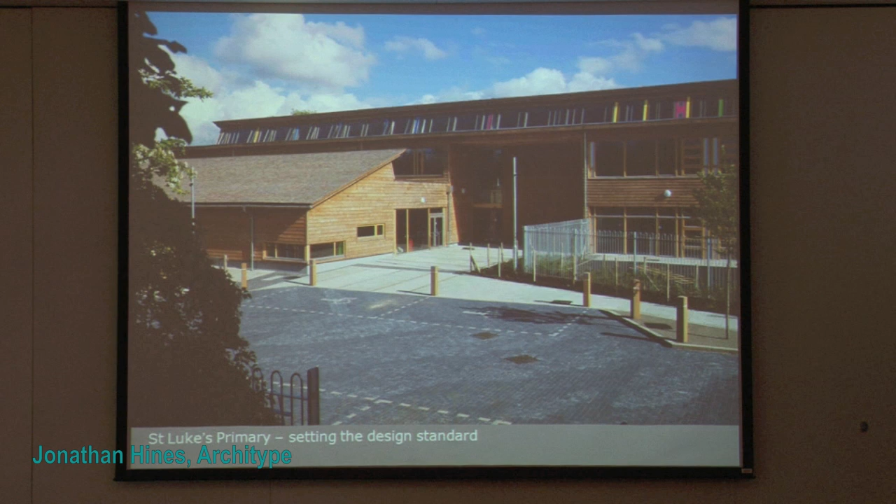In terms of education, we're looking at buildings that take that philosophy and deliver on a radical educational agenda. The example which illustrates this best, which predates our Passive House schools, is St Luke's Primary School in Wolverhampton, which really sets the design and educational standard for the projects, and which also incidentally was the first primary school in the UK to get BREEAM Excellent.

We worked here in a very tough inner city part of Wolverhampton to deliver a radical approach to a highly insulated, triple glazed, timber clad building full of natural daylight and natural materials, so that the energy consumption is good, but also the quality of the spaces is good, the environment is good.

Everything that the children feel and touch, the handrails, the floor finishes, are all natural materials: timber, lino, rubber, natural paints, in order to create a calm, enriching, uplifting atmosphere in which children can learn better and teachers can teach better.

If you want to see a little video about this school, it's down on the Architype stand downstairs, where you can see the children talking about how much they appreciate the school. Full of natural daylight and beautiful spaces, we believe that school buildings should be great places, great pieces of architecture, not just machines for learning in, places where people can actually breathe and live and be.

So the two Passive House projects, also for our client Wolverhampton City Council: Oak Meadow Primary School, a 2-form entry plus nursery for 450 children, and Bushbury Hill Primary, a 1-form entry plus a nursery and a special support unit for 240 children. The timescale: we were appointed in December 2009, had to get to planning and tender by April 2010.

Contractor appointed by June 2010, on site September 2010, and completed by October 2011. So quite a demanding programme. I'm delighted to say we handed over the first school last week and the next school this week, and the children will be starting in them next week.

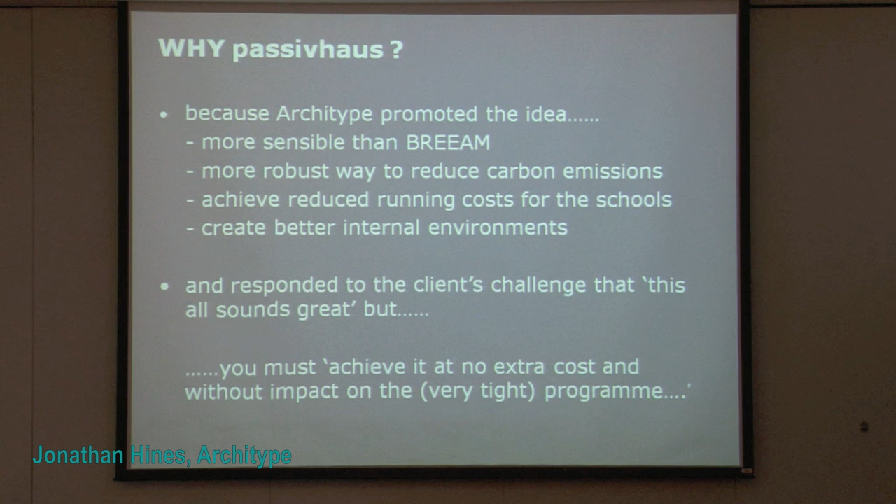But also because we responded to the client's challenge: that all sounds great, but you must achieve it at no extra cost without any impact on the very tight programme. So we had a standard allocation for a primary school in the then primary capital programme, and if we wanted to do Passive House, we had to deliver it at no extra cost.

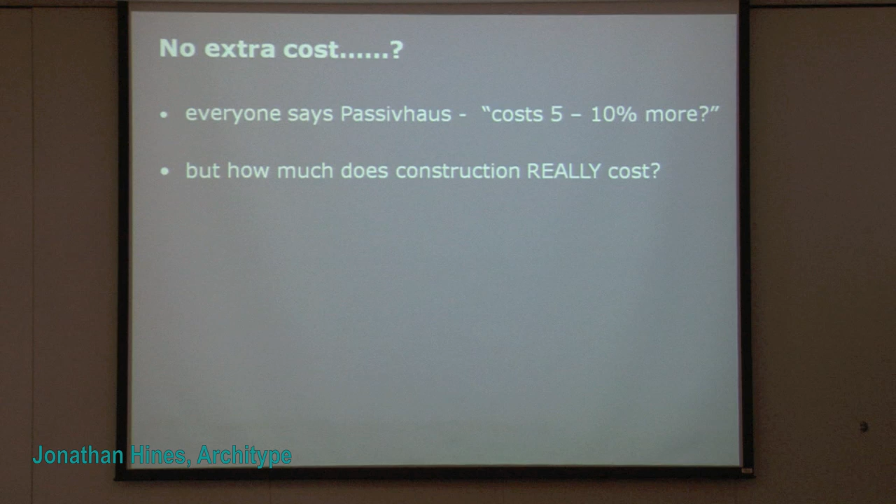I find so often, particularly when doing design reviews in Wales with the Design Commission for Wales, architects come and present a project and say we can't afford to make it any more sustainable. I look at it and they've got complicated plans, sections, bits of structure flying through everywhere, 5 or 6 different cladding materials on the elevations, tricky junctions everywhere, and they say they can't afford to make it more sustainable.

And I say to them, no, you've chosen to take your client's budget and spend it on architectural complexity. You could have spent that money and made it more sustainable.

Now obviously there are extra costs - more insulation, better performance windows, achieving better air tightness, providing MVHR. There are also reduced costs in school projects: we have a smaller heating system, we can get rid of the need for underfloor heating - in fact it's better without it - we can have much simpler controls, and there's no requirement for renewables to reach our targets.

And there are some things which obviously shouldn't cost any more. If we design a good building, it shouldn't cost any more to build. If we eliminate thermal bridging in the design, that won't affect the cost. We keep the construction simple - it should actually make it cheaper, maybe.

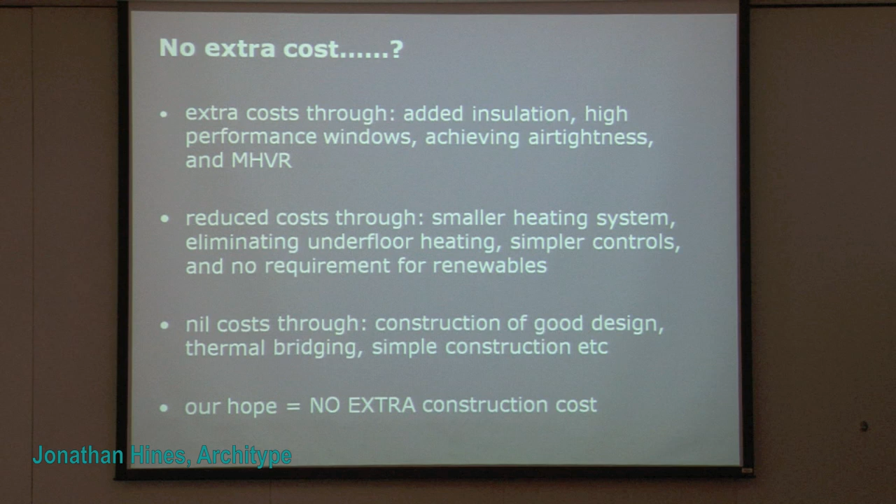So our hope at the outset was that we could achieve Passive House at no extra construction cost. Matt will talk more later about how or whether we achieved that. But our belief was that to achieve that, we had to focus on simplicity and evidence.

By simplicity, I mean looking for what we can take out to make a building work better. The simplest way to achieve simplicity is through thoughtful reduction - what can we take out of a design just to make it work better through its fundamental architecture? As the great jazz musician Charlie Mingus said, making the simple complicated is commonplace; making the complicated simple, that's creativity. Some of the most elegant, long-lasting designs in the world are the most simple.

The other thing we believe is fundamental to our approach to design is basing it on evidence. We like Passive House because it's an evidence-based, physics-based design approach. But one of the things the UK building industry is terrible at is learning from its past projects. We have a process of perpetual pilot projects, never learning from previous ones. Car manufacturers would be horrified at the way we treat our clients as crash dummies, who when they move into their buildings just have to cope with it. Hit and run should be a thing of the past.

So for the last 2 years we've been working in partnership with Oxford Brookes University on a 2-year research programme to monitor the performance of our buildings, to learn the lessons, to find out what works and what doesn't, and to feed that back into our design process. So simplicity of design and basing it on evidence of what works is fundamental to achieving Passive House at an affordable cost - in fact, to achieve any design that's going to work at an affordable cost.

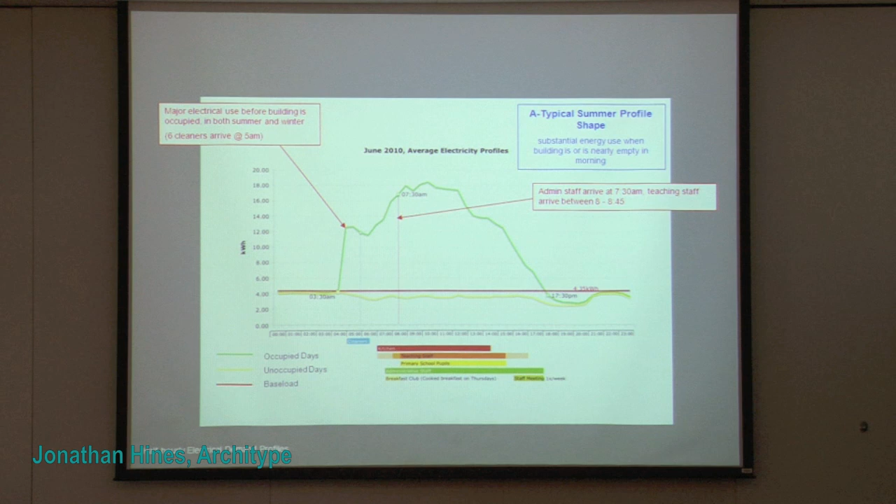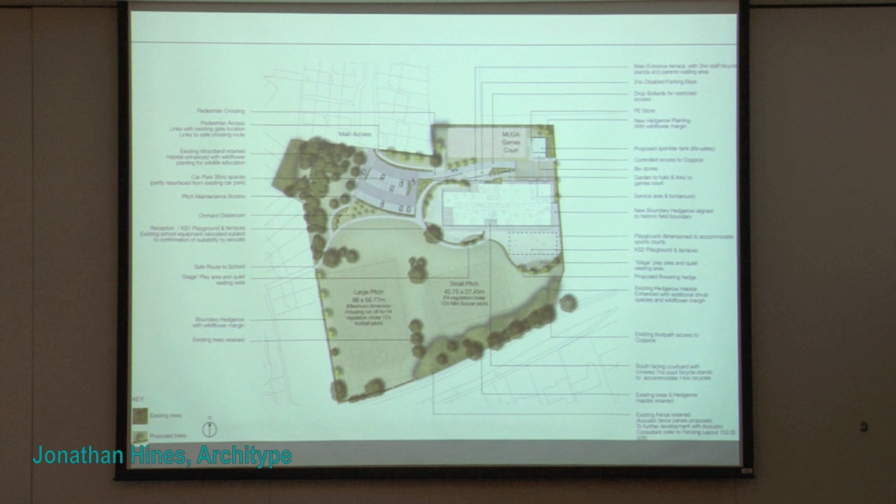So the project, Oak Meadow Primary School, 2-form entry, is a replacement of an existing primary school on a site where we were able to place the building very, very exactly on a east-west axis, with all the primary rooms facing due north or due south. We then demolished the existing school building, which sat on the site of the new car park, once we'd built the building. If you look at the plan, you'll see it's a 2-storey building.

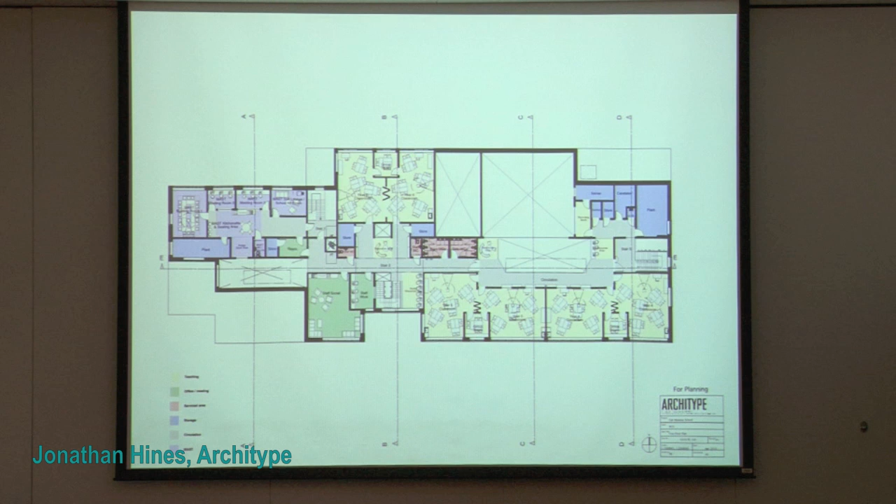We looked very carefully at form, developed a 2-storey building, kept the plan as rational and simple as possible, creating groups of classrooms organised around shared hub spaces and logical connections, good orientation, simple planning around the building on the ground floor and then on the first floor. There's a view of the building at design stage in its context.

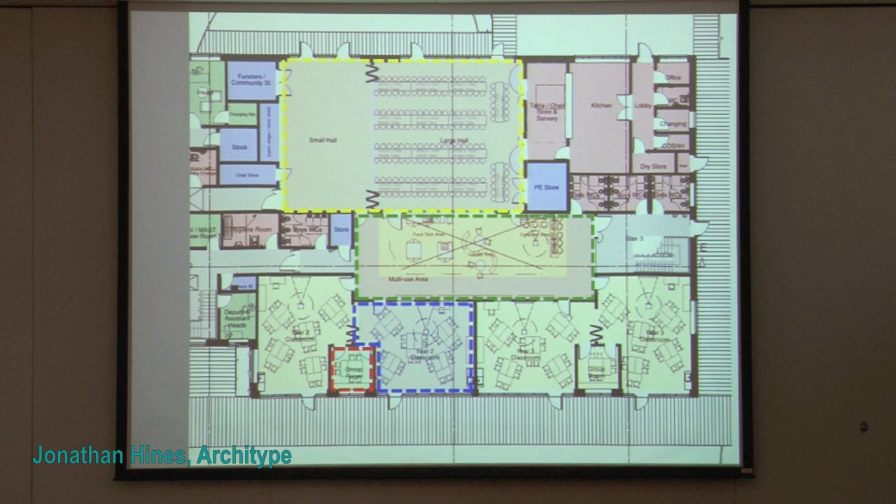Looking at the plan in a little more detail, there's a hierarchy of spaces: we've got the group room shared between 2 classrooms, then the classroom itself, then the shared activity space off which the classrooms open, and the main school hall. Nick will talk about this strategy in relation to the ventilation system in his session.

The same thing at the first floor level: group room, classroom, shared hub space, and the upper part of the hall. When we look at the section, we worked very hard to rationalise it, to have a simple extruded section that runs along more or less the whole length of the building, allowing good solar aspect but good control. We're really working with the plan and the form as an integrated piece of design to maximise its relationship with the environment and its performance in PHPP.

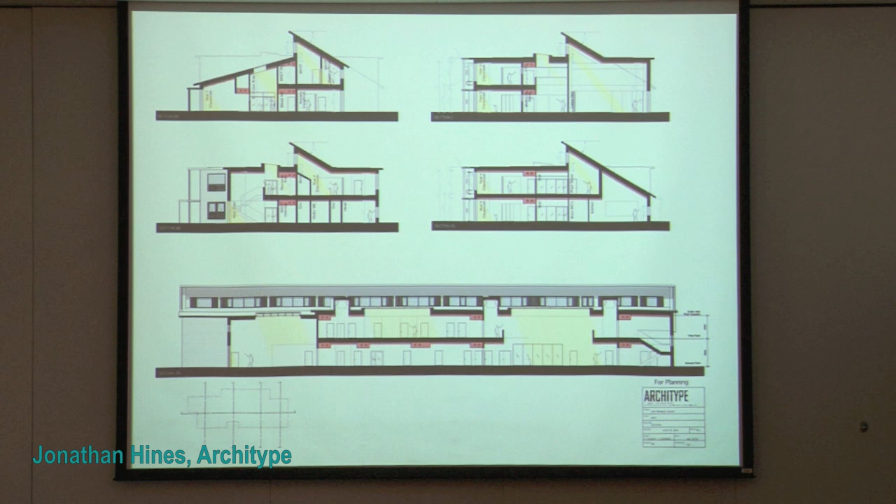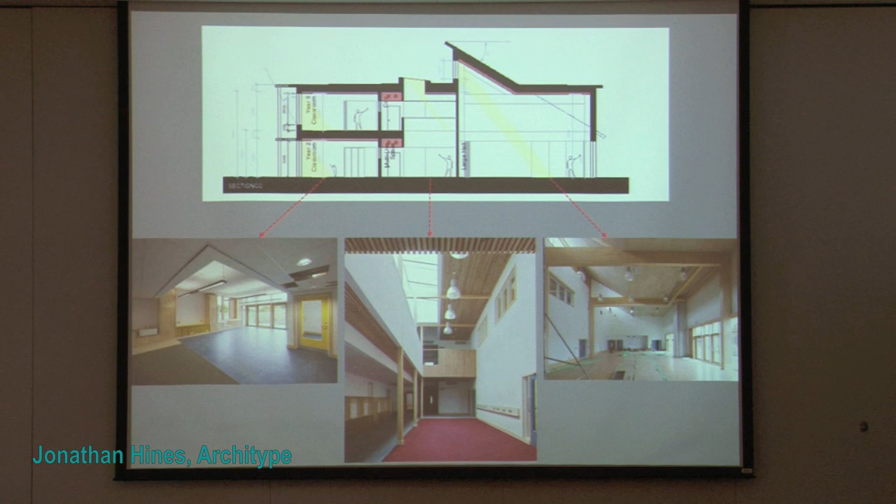Moving in on one particular section of the building, just showing you how some of the main spaces work. We've got the classroom on the left, the shared hub space in the middle, and the main school hall on the right. You can see how each of those spaces has good daylighting and a sense of connection and space between the inside and outside and between each of the spaces within. Here's another view of the shared hub space with some of the shared things like art and cooking and library spaces going into that hub space.

Upstairs, there are more group spaces that connect the downstairs and upstairs together in that hub. The same hub space appears in the early years area, where the nursery and the young children have a shared activity space connecting their classrooms together.

From an architectural point of view, another aspect of making the architecture work with Passive House and the cost, we spent a lot of time looking very hard at the glazing. Glazing is very expensive, as you know, to get to Passive House levels. So we looked at simplifying the glazing, looking very hard at what open free areas we needed for ventilation in summer conditions, for night cooling, to work with our overall strategy.

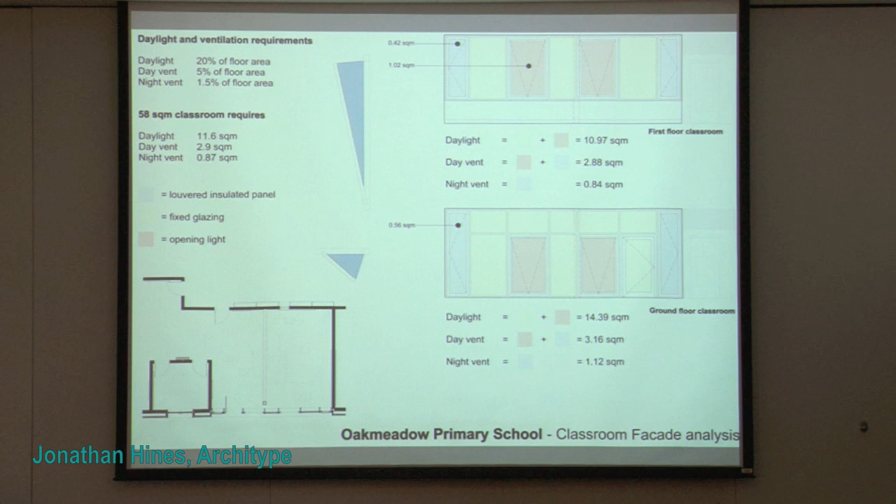A lot of effort there on keeping things simple, having some very big openings and secure night insulated louver panels. And there you can see the finished building in relation to how that's worked.

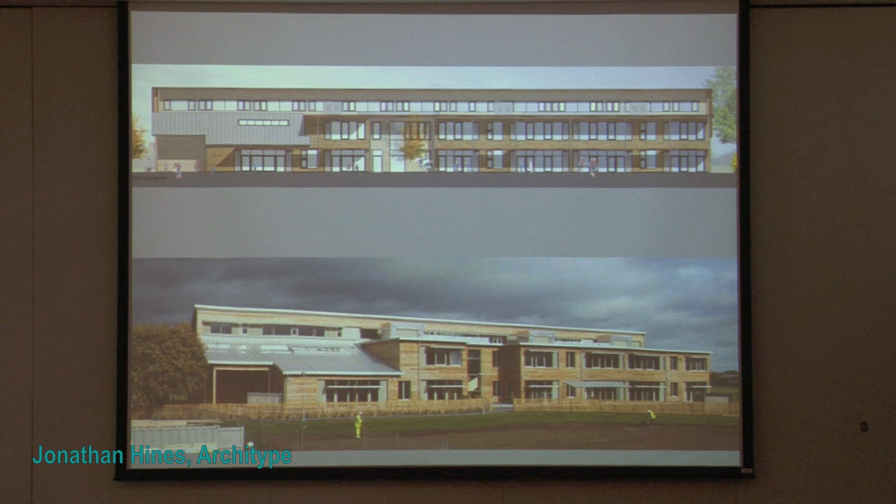And the view of the whole building emerging in its context. You can see there the very simple rationale of opening doors, ventilated louvers, brise soleil, allowing good solar aspect but also good shading.

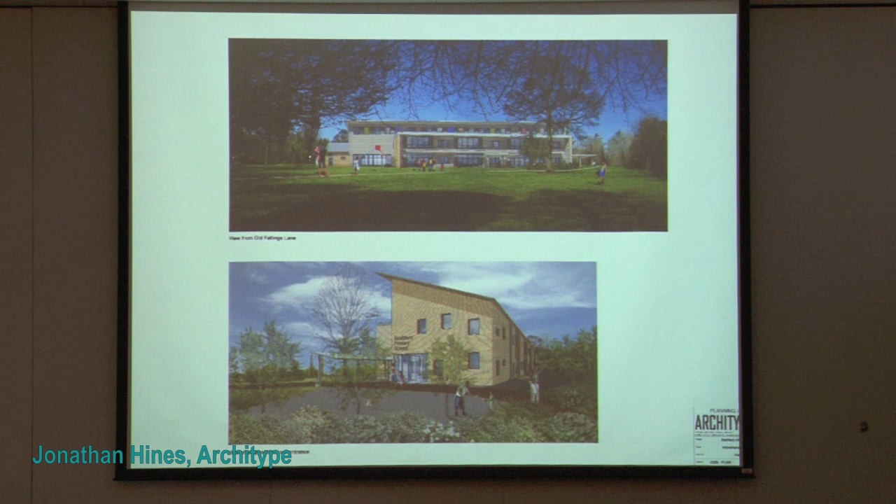The other project is Bushbury Hill, a slightly smaller building. This site had a completely different orientation, but we located the building again to face the correct orientation, north and south, within the slightly strangely angled site. What that does is create a whole series of opportunities for some really interesting outdoor spaces within the site itself.

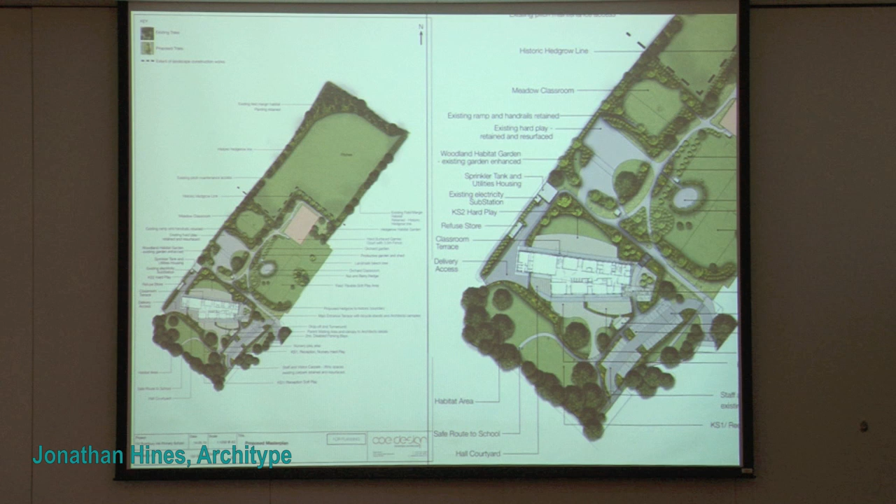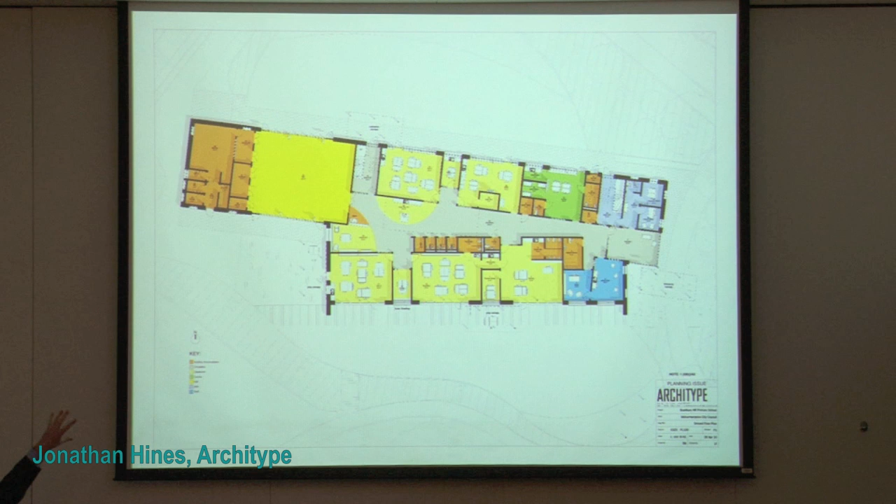Being a much smaller building, we've actually come up with a much simpler plan. Like all of our school buildings, we're trying to get rid of corridor spaces and use those as actual teaching spaces. So here, we've got the two halves of the building pulled apart slightly to create a very generous shared access and activity space with the school hall and the kitchen on one end of it.

Again, a lot of effort put into keeping the form of the building very simple, with an extruded section that runs right through the building.

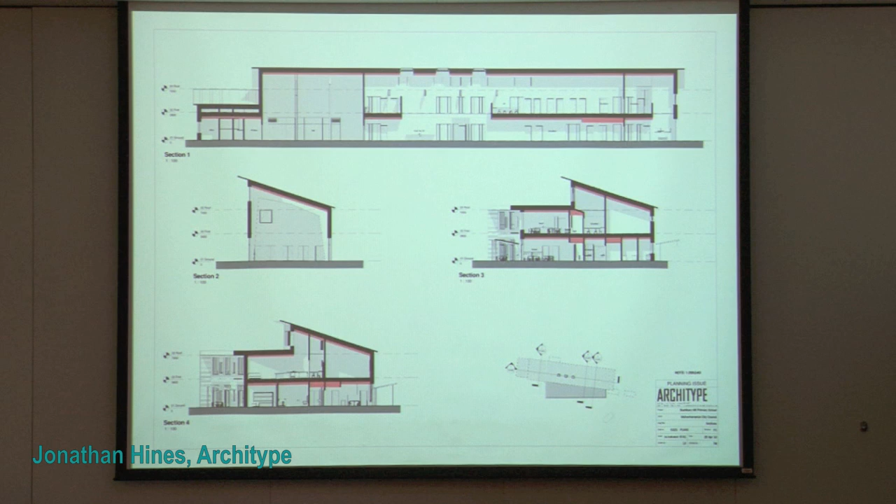Here you can see the two parts of the building, the classroom unit to the front, where we've used, for most of the windows in this building, the roof overhangs on both buildings as the brise soleil instead of a separate brise soleil - a slightly different approach on this project.

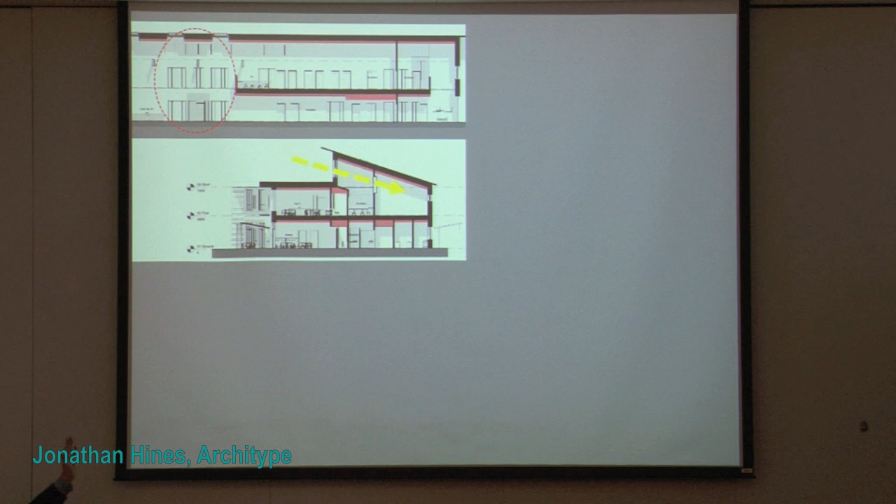Moving inside the building, a very simple section. South is obviously on the left-hand side here, so you can see the classrooms on the south with good solar aspect and the overhanging roof for the brise soleil. We've got a number of classrooms on the north side that actually get very good daylighting borrowed through the hub space, which you can see with the yellow arrow there.

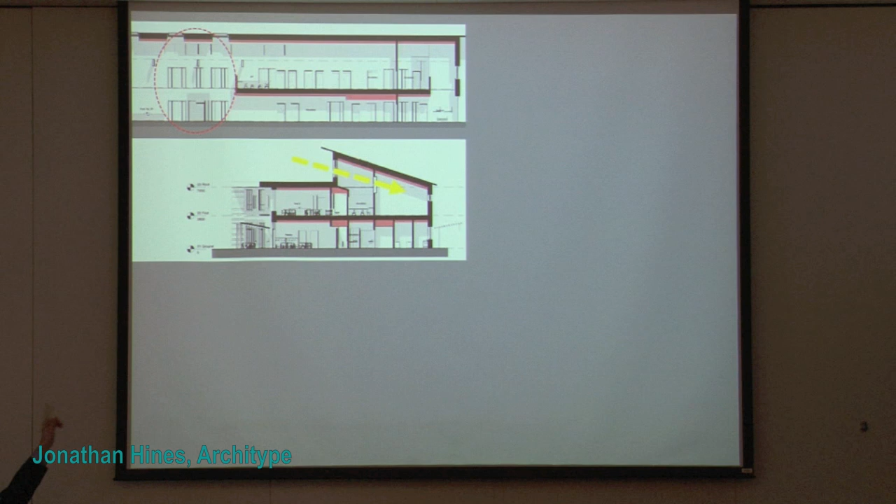When we move inside, you can see at the bottom left that shared hub space, with some of the glazing connecting that hub space into the classroom on the north side, and a picture of one of the rooms on the north side, which has such good daylight in it you would never believe it was on the north side of the building. Borrowed light works extremely well there.

Hopefully in all these pictures you can see that Architype combination of natural materials: timber slatted ceilings for good acoustics, natural linoleum and natural rubber on the floor, a lot of timber with natural organic finishes, natural paint on the walls - a whole palette of healthy, natural materials.

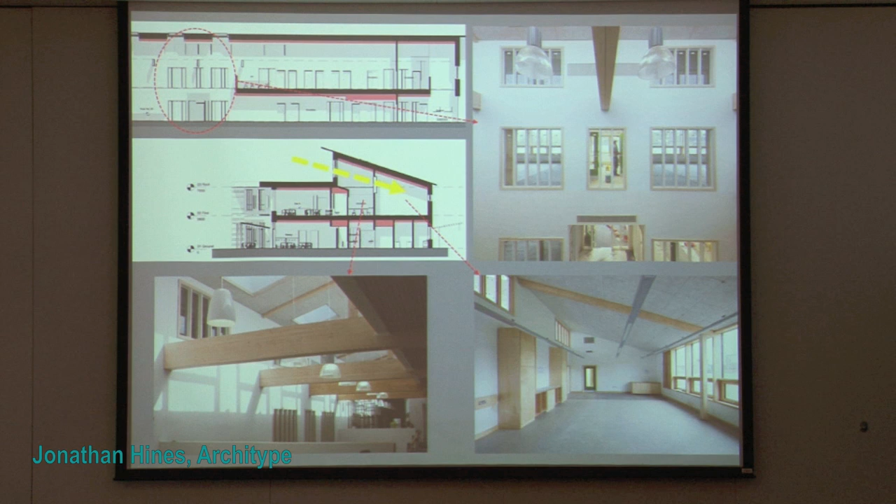So what we're trying to achieve, what I hope I've demonstrated, is that we've managed to keep hold of our passion for design quality, of healthy building, of good daylighting, of good materials, in a building which also achieves the very technical demands of Passive House.

For architects, in the words of Steve Jobs, design is not just what it looks like and feels like, that is fundamental, but it's also how it works. And so Nick is now going to take us through how he helped us make it work.

It would be nice to start with a small detached house, but we started with 3 schools as our first Passive House project. It's a bit at the deep end, so we had to do a lot of desktop studies - looking at form, structure, ventilation, heating, primary energy and certification. There's a lot to cover, but bear with me.

We started off with visits to Germany for Passive House conferences, which we've been going to for some years. Alan, who I work with, went to Belgium - there was a study tour there looking at education buildings. This was really to gain confidence, because when you start looking at tiny boilers, tiny pumps and tiny pipes, you need the confidence to do the sums and believe the calculations. Seeing is believing, I think that's really important.

One problem is that a lot of the knowledge is only in German. There's lots of information on domestic buildings, plenty of that out there in various languages. But when you get to schools, there aren't so many built, and there are key bits of information which, not being a German speaker, we'd notice interesting-looking drawings and think there's something important here. So that was a potential stumbling block.

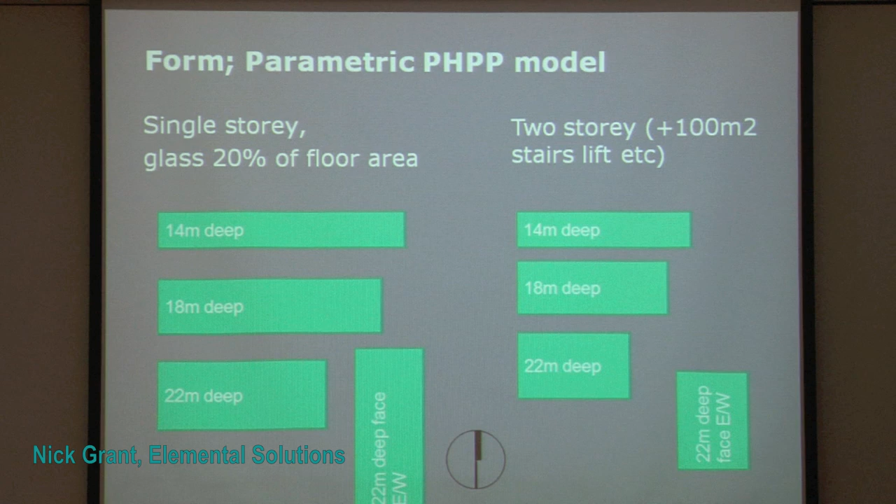There's incredible complexity in PHPP, but because it's a spreadsheet, you can write very simple front ends. Here we were just messing around with the idea - okay, we can do single story, 2-story, change the depth, rotate it. Without knowing what it's going to look like, we just put in an area of windows, set at a certain schoolish window size, and the spreadsheet says you've got 57.5 windows, it's fine - the math still works. So we could do this analysis and try various things. With 2-story, obviously we've got stairs and lifts, so we lose some treated floor area, but overall for this building you can see there's a real benefit in the compactness of a 2-story design.

The other school we're working on, which is what we did this analysis for, because it was that much smaller, the stairs had more of an impact and we ended up single story. So there's lots of things to balance, daylighting, access, costs, so many different things. But we can do this analysis and it's part of the process of weighing everything up.

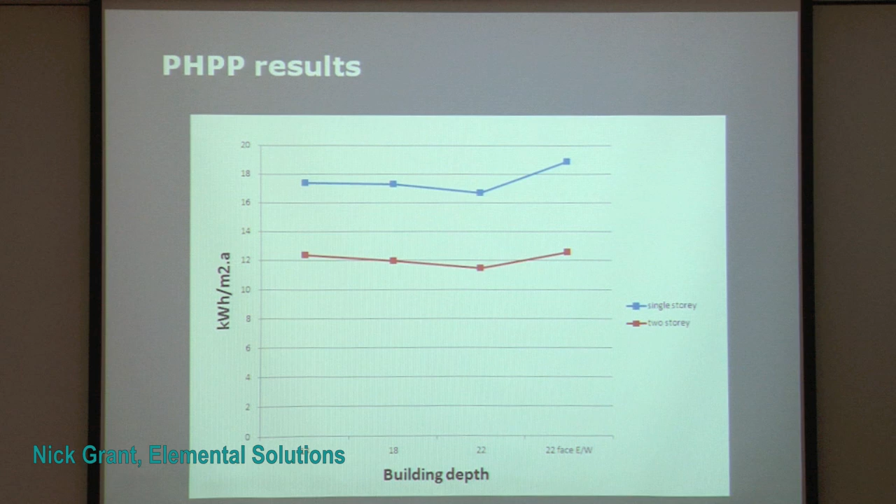And at a very early stage, this pre-planning, we've got a sketch design, we've got the rough shape, and the architects are saying, oh, have we passed? Have we got Passive House? Pre-design stage, pre-planning, and the spreadsheet saying 14.9 kilowatt hours, and they're all going, yeah. And we're saying, no, whoa. No champagne yet.

There's a real danger at the design stage, not only because you haven't got any slack, you need some slack, stuff you haven't thought about, the mistakes you're going to make, the things that come in later. But also, if you set a much tighter target when you really are at the conceptual stage with basic U values and so on, you've got a real chance of making the school cheaper.

If you're too tight at that stage, you start having to use thicker walls, you have to start using very expensive glazing, you start having to get a more expensive MVHR, you start having to add things on because you've slipped and slipped. So if you can hit a really good standard, you can say, well, we can take some insulation away, let's not overdo it.

So I think this is, if you want to get a cheaper building, you've got to let the form do the work. It'd be nice to talk about why architects, even if you don't learn PHPP—and it seems daunting, but it's just very basic physics—I think it's got to be, whether it's the engineer in your office or you're learning it yourself, that interaction, that iteration is really important. That happened with these projects.

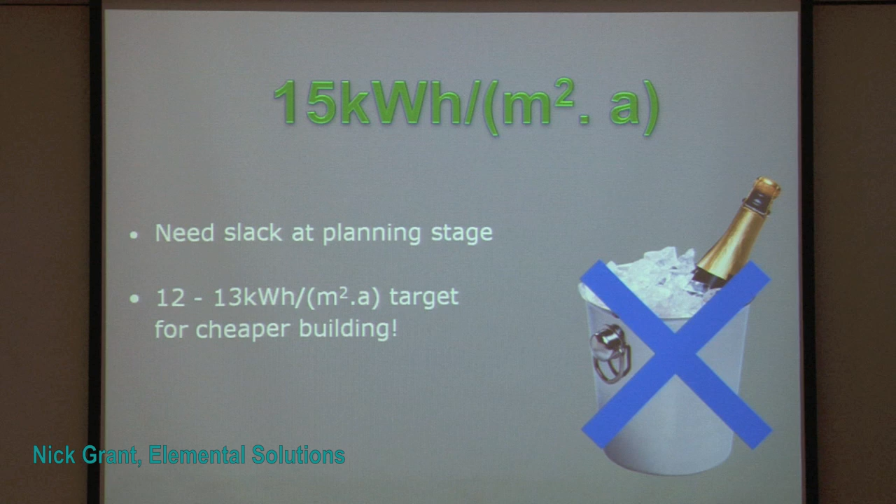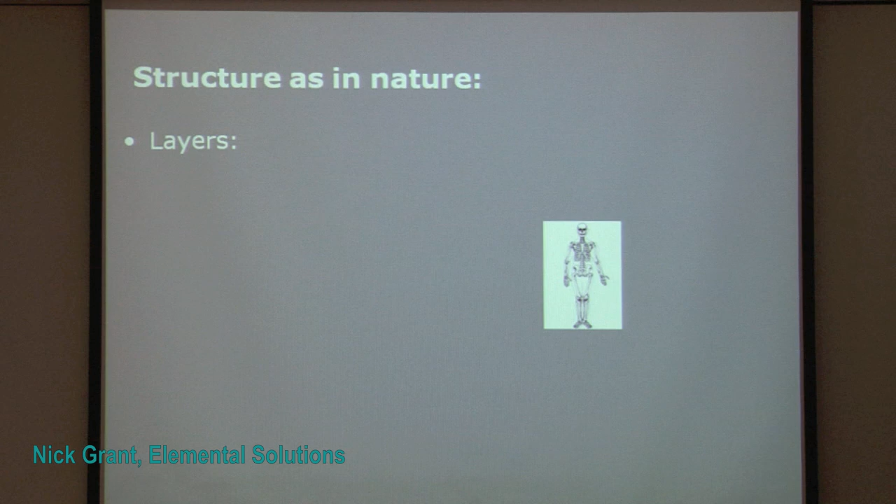PHPP aside, the other thing I feel passionate about is thinking how all the structure happens. And I look at nature with the human skeleton or any mammal. Generally in nature, the skeleton's on the inside or the outside, okay? And for mammals, it's on the inside. So this is coming up in the wrong order.

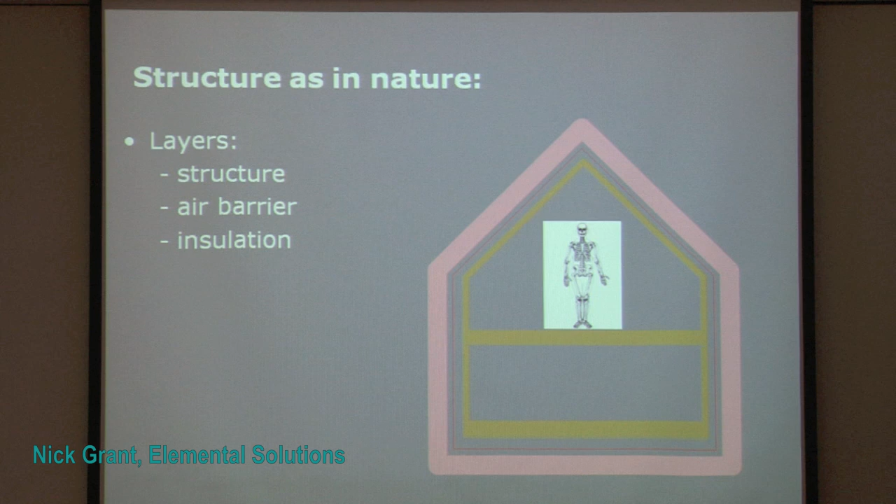So we've got the structure on the inside, typically. We've then got our air barrier coming around the outside, so it's continuous. We then wrap it like a tea cozy with our insulation, completely continuous. So again, the body is like that. It's only where your teeth come through. And that's the bit where you have to visit the dentist every 6 months and have medical insurance and stuff, because it's a problem. So then we've got a wind and weatherproof layer.

And then external structure, whether it's porches or brise-soleils or whatever, but the important thing is no penetrations through the structure. Now, sometimes you have to do it, but there's always a cost involved, there's a maintenance issue, there's some fancy bits of German kit to make it possible. So if you can avoid that, then that really makes your buildings cheap and simple.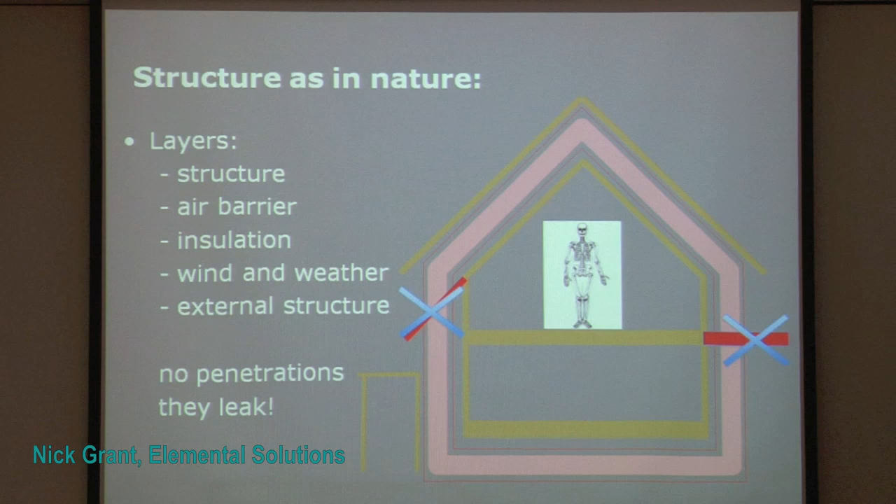So here's the build-up. This is Bushbury School. We had a problem here. We actually had on the site cellars and mine workings and all sorts of stuff, so it obviously had to be a pile foundation, which is a thermal bridge problem, an air tightness problem.

What do we do? So the solution there was sketched on a napkin at EcoBuild, handed it to the structural engineer, and it appeared on the drawings, and it went through the whole thing, and nothing changed, so it was quite impressive. So we've got strips down the length. Do you remember on Bushbury? This is Bushbury with the one that was at a slight angle, so we had 3 strips on piles.

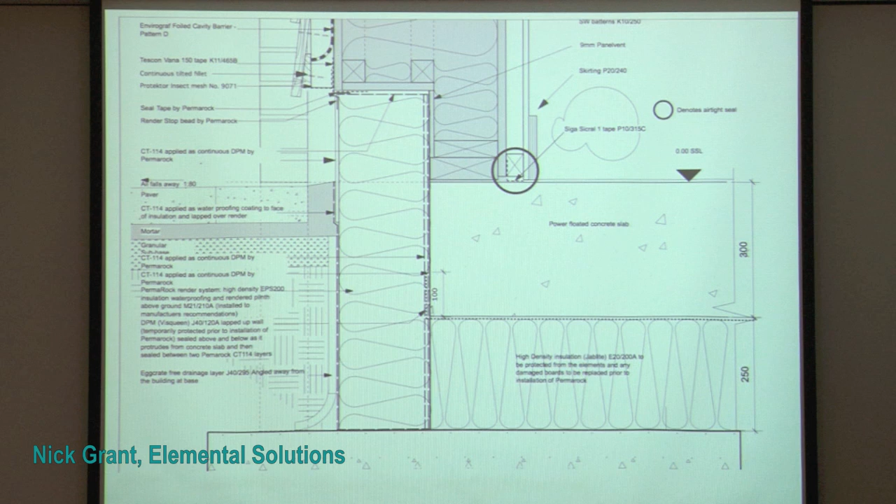We then put EPS insulation over the top, so that's the structural bit. We've got the slab on top. Insulation, so it's just floating, no penetrations through that. We've put edge insulation around the slab, and the load is all taken onto the structural slab and the internal walls inside. So the whole thing's completely thermally bridge-free, completely wrapped.

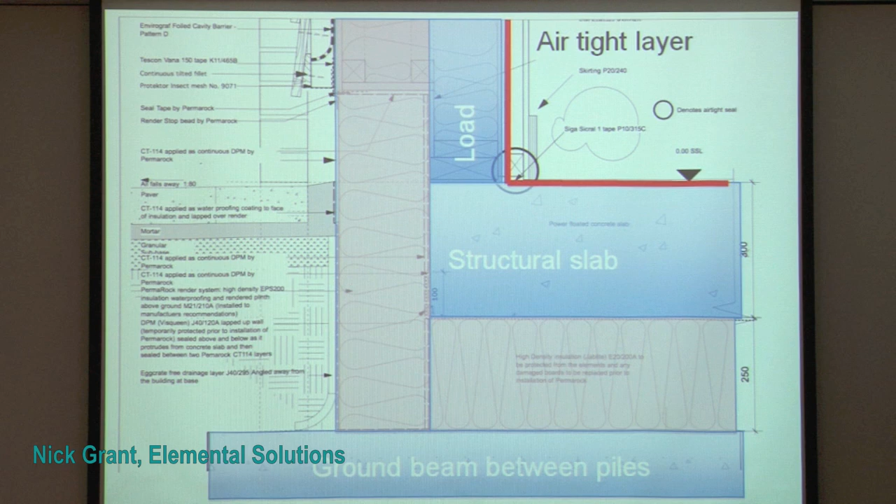And you see the wall build up here. This has got quite a high timber fraction. This is 140 studs taking the load, and outside it's light and fluffy. And to keep it level with the ground, because we've got level access, we've got EPS coming up until we get to the point where we're confident about using timber, so we're above the splash line and so on. So then it's thermally modelled, thermal bridge free by external dimensions, heat flux and so on.

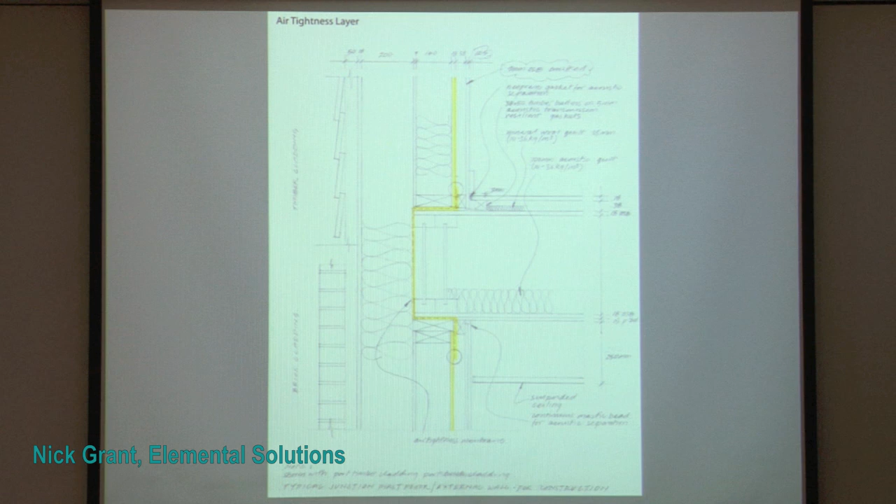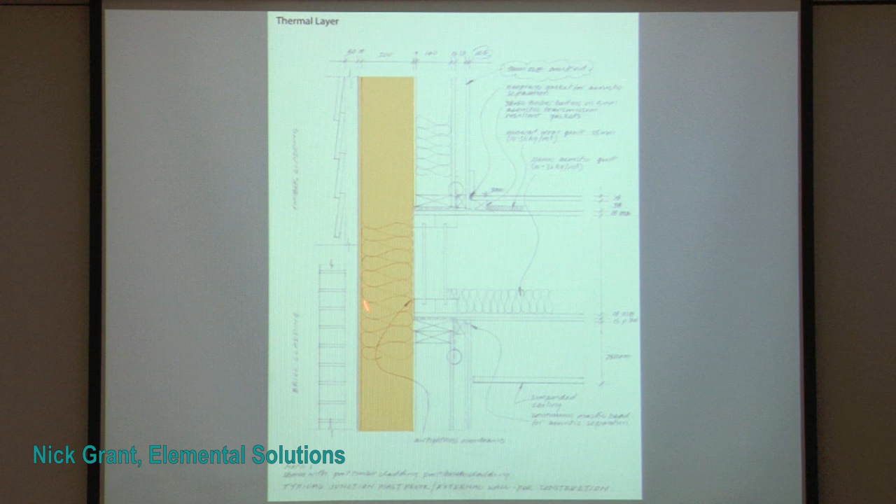We get to the first floor, so it's got to go in. We've got a compromise here, we're having to take the air barrier around. We're not penetrating the structure, it's in the same line, but we've got to wrap the air barrier around that structural zone. We've put some insulation in the structural zone as well, and we've got a service zone here to protect the air barrier. This is continuous, goes down to the floor and joins up with the roof as well.

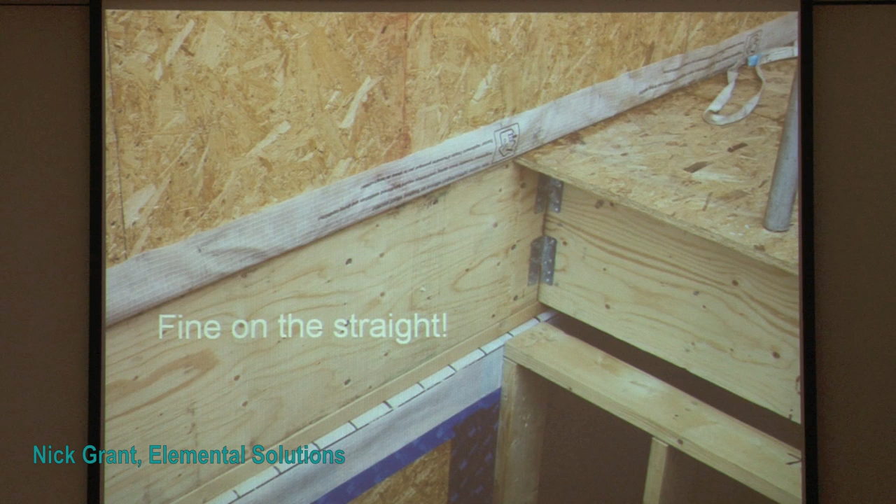So this is the section, you can see the air barrier here is the OSB. We tape it onto the membrane, it wraps round the structural timber there and carries on down. Very nice, simple detail, until you get to a post in a corner on a Friday afternoon and everything goes terrible. But it got resolved.

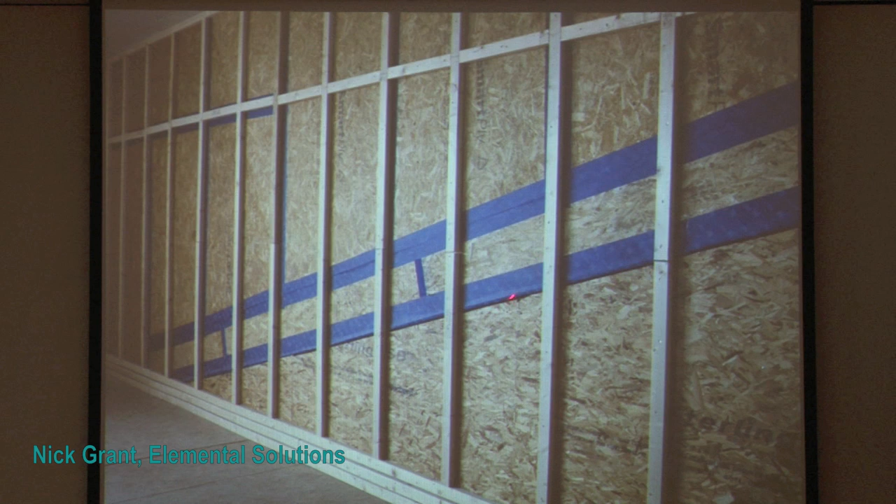So here's how they solved it. This is the air barrier, this isn't air barrier, it's just structural. The air barrier has to go through there, and that becomes the underside of the roof we saw, the lean-to roof. So it's the sort of stuff we've got to think about. Here, glulam, because the timbers are going that way with the insulation, but we're spanning onto this, but this stops short of the outside, so it doesn't go through the air barrier at all, which makes the detailing much easier.

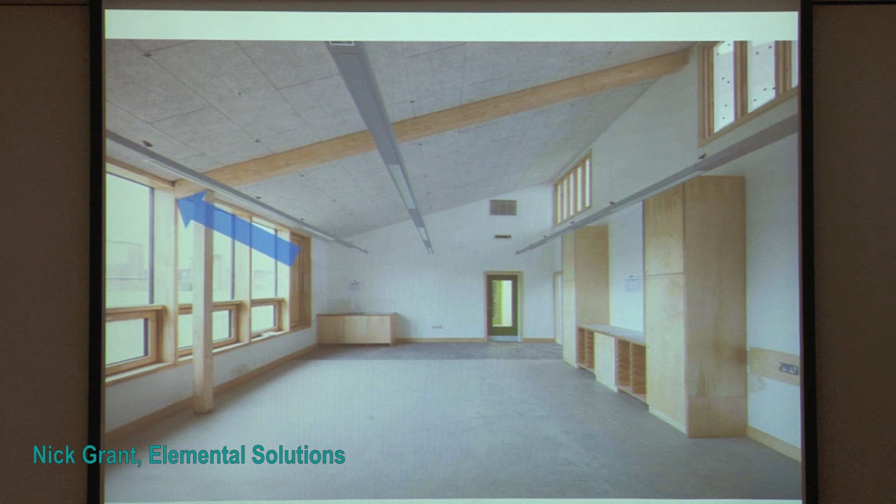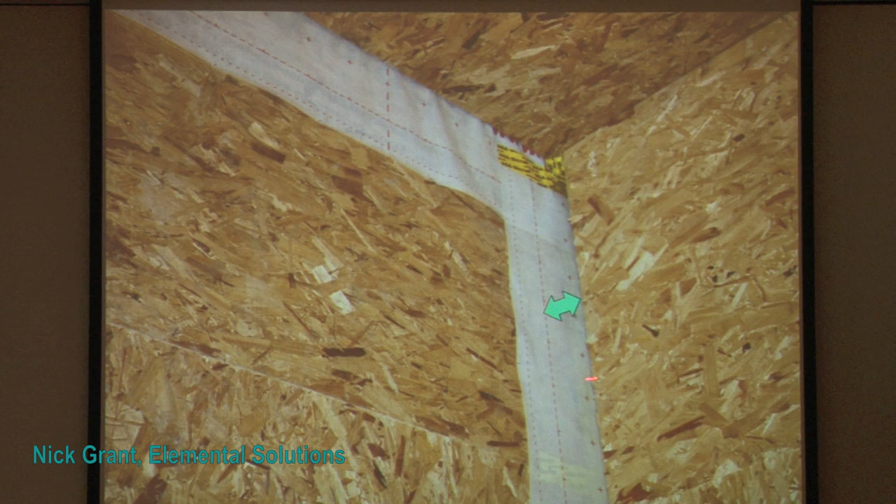And then the internal walls - this is an external wall, this is an internal wall. We've left a gap, so it means we can do the air tightness, we can tape that, we can run membrane through, and then we add in the timber which locks it all together structurally, and this becomes our service void. Very good detail.

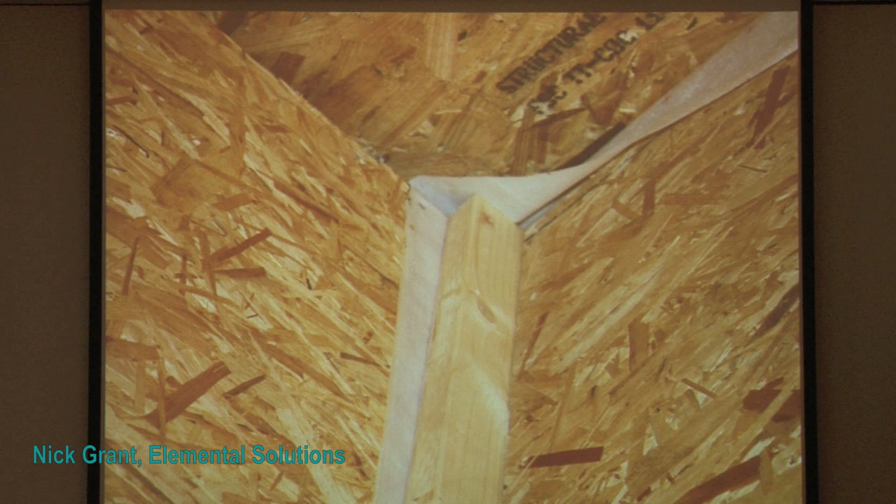Took a little while for the timber frame contractor to get this. He's now on site with another school, I was there the other day - brilliant, he's just really got it. It's not a problem, he realises why we're being tricky with him. Something else I've been doing for quite a while now - again, overhangs and stuff all sat on the outside of the windproof layer, so there's no penetrations there.

Ventilation strategy - there's a general thing with Passive House, we're supplying to living areas and extracting from wet areas like bathrooms and kitchens. Similar idea with the school, so we're supplying to group rooms and classrooms. The air's moving through very large transfer grills, because we're also doing the natural vent strategy through the same transfer port, so that makes them quite big and expensive, but it means we're also ventilating with windows in the summer. And then we're extracting largely from the hub and the street and toilets and things which connect into the hub. This is our air handling unit here, so that's the general principle of sending the air through there.

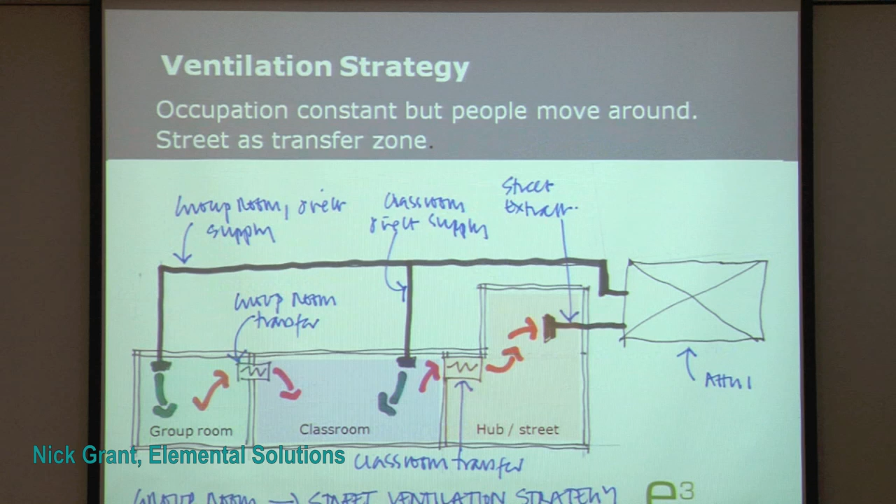Now, one issue is the hall - what do we do there? Because the kids, when they're in the hall, they're not in the classroom. So one method that is used is you have dampers in all the classrooms with presence detectors, so when the kids aren't in the classrooms, you shut them down and transfer, opening up other dampers. So we could have done that.

E3, as you hear from E3, came up with this very neat idea. We treat it that if you're not in the classrooms, then the air is clean. So we're pumping air into the classrooms, it's coming out of the classrooms into the hub space. And then when the hall's CO2 level goes up - we've got one CO2 monitor in here - the fan sends air from the street into the hall and around. We've got recirculating mixing where we can, with a heater battery, if the hall's a bit cool we can just quickly warm it up like an air heater, so we very quickly take the chill off if there is a chill. If it's a prize-giving evening and 1,000 people, we open the windows - it's not a problem. So trying to keep it simple.

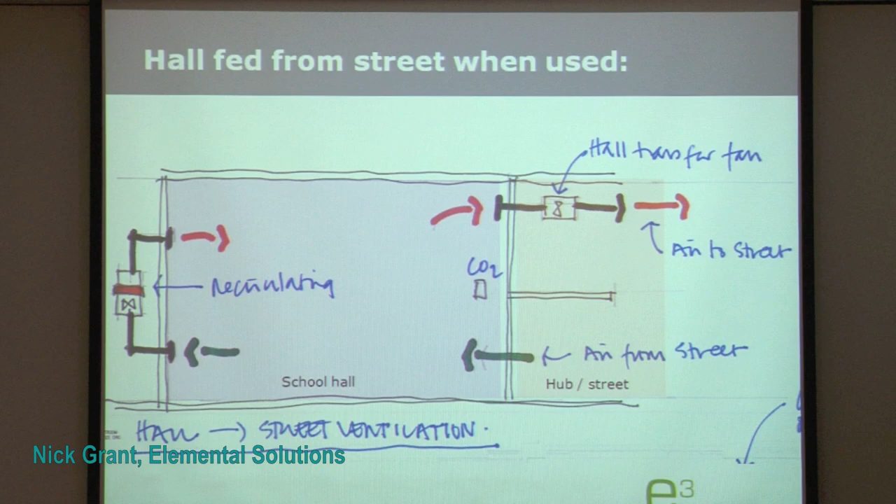So here you can see it working - that's the hall transfer fan. This is the recirculating with the heater, so that's just to mix the air up.

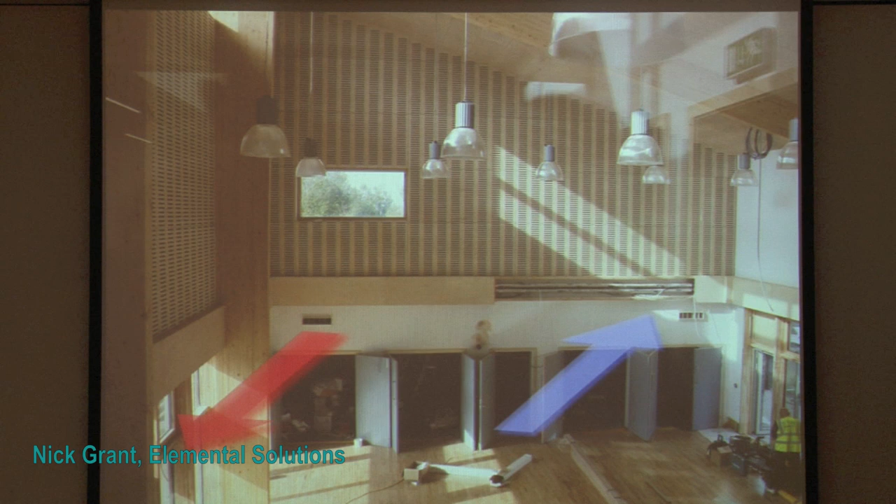But they're taking the fresh air from the street area. So other issues with non-domestic, with time control - there's a lot of fan power. If we're running the ventilation all through the night, you also tend to make the air overly dry because you're ventilating when there's no moisture being generated. So we want to turn the ventilation off. Fine, that's easy to do with a timer.

Wolfgang Feist said the thing you must do if you do this - it's the right thing to do - but you must dry the filters before you turn it off. Because if it's very humid, foggy outside, the air's coming through the filters, then you turn it off, the filters are all moist, and when the air's moving it's fine. But when the air stops, mold can grow, and when you turn it on in the morning you can get smells and odour problems. He says it's been a big problem in Germany. We didn't know about that, we nearly didn't do it, but we had to introduce that into the system.

CO2 modulation is simply built into the heat recovery ventilation units, so it'll tend to just modulate it for the whole school. We haven't got individual sensors apart from the hall, partly to keep it simple.

In the summer, we're turning the ventilation off. We're still needing, in the kitchen, to get rid of heat, so we've got serious extract on the kitchen, which has its own heat recovery, only 50% efficient. It's just to take the chill off - that's really just for comfort.

But in summer, the toilets still need ventilation, and they're in the core so they don't have windows. We've got some landlocked small rooms that wouldn't get ventilated, so we've got another fan that runs in summer, but we're turning the main MVHR off in summer. It was a decision, using window ventilation instead.

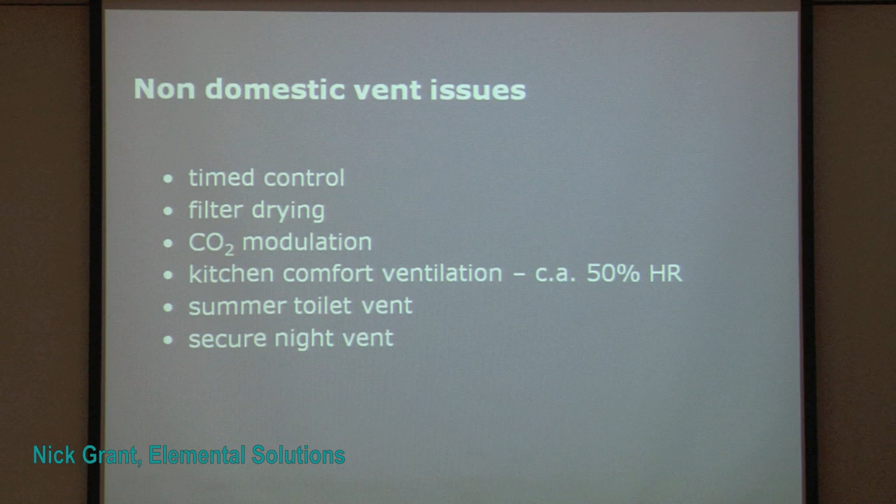And secure night ventilation - we discussed this earlier - is really very much built into this, that is the cooling strategy at night. We have grills that open, you see at the top here in the clerestory. Behind that, there's an insulated panel. In daytime, we've got windows that open.

These high ones are all on actuators. The lower level, our preference now is for manual opening. Someone becomes the night ventilation monitor, watches the weather forecast, and does this. We think this is a robust way of doing it. We've got one that's automatic, one that's manual - we'll see how it works, but my money's on the manual one.

So secure ventilation, we leave it open for night purging. Kitchen, as I say, was a big challenge.

We didn't have much information. There's a tendency that previous schools have had overheating problems. We were pushing to not over-ventilate, not try to solve overheating with masses of ventilation, but try to reduce the gains. So we're using induction cooking rather than gas, efficient ovens, all A-rated refrigeration and so on. We've got rid of the hot water circulation, which used to be uninsulated pipe running around the kitchen acting like a radiator - so everything's dropping from the ceiling now.

So we've really gone to great lengths to try and get the gains down and reduce the ventilation rate, but it has its own MVHR with a runaround coil on the kitchen.

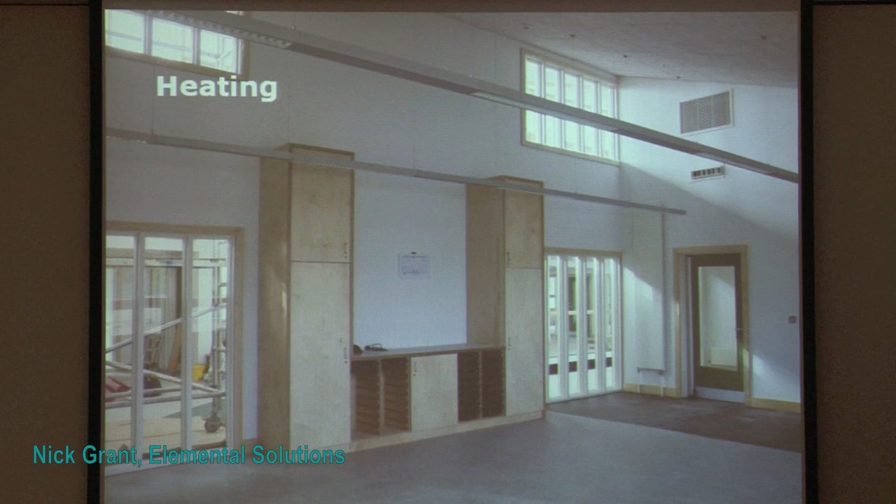The heating system, if you can spot it, is very discreet - radiators, just a few. I think the next school will have even less radiators and they'll be smaller, but we'll see. There's a bit of nervousness when it's your first one, if people are cold in the winter, but at the moment looking good. No underfloor heating for various reasons, which we won't go into.

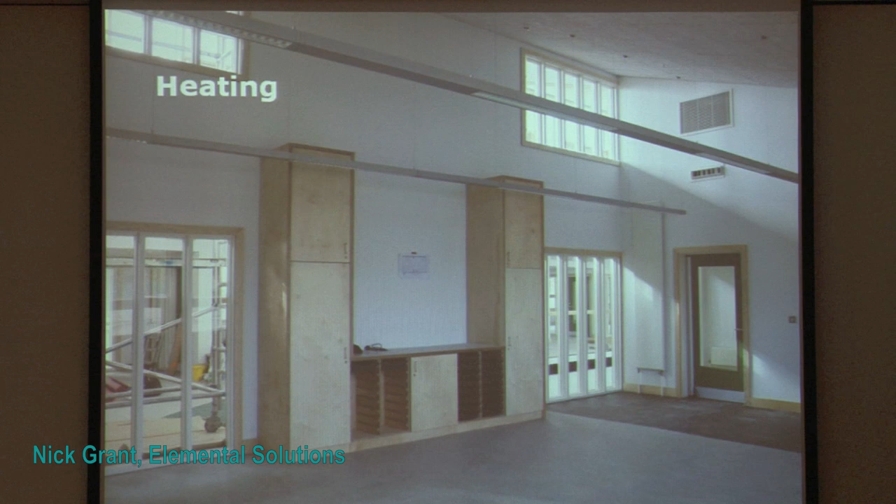And you see here the borrowed light that John mentioned - very effective.

And the boilers - this is Lee, the job architect - two boilers here. He said, bloody hell, that's smaller than the boiler in my house. I got home and quickly checked the rating, and it's actually, we think, four times the capacity we need. So again, we'll see.

But it's not ridiculously over the top, and that's just for space heating. We've got some Andrews water heaters for water.

Domestic hot water is absolutely critical - we'll see when we get to primary energy. It's a constant battle for us to try to reduce the losses from hot water systems. Very little hot water use in the school, but an awful lot of losses from circulation and so on.

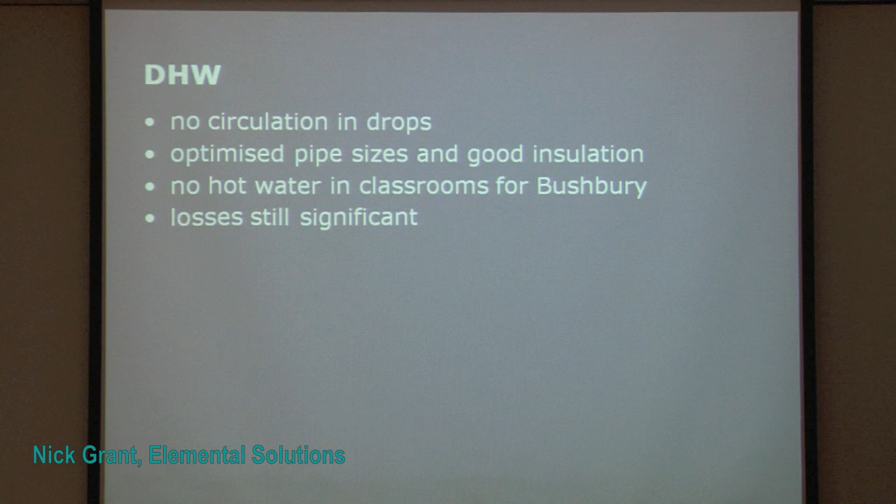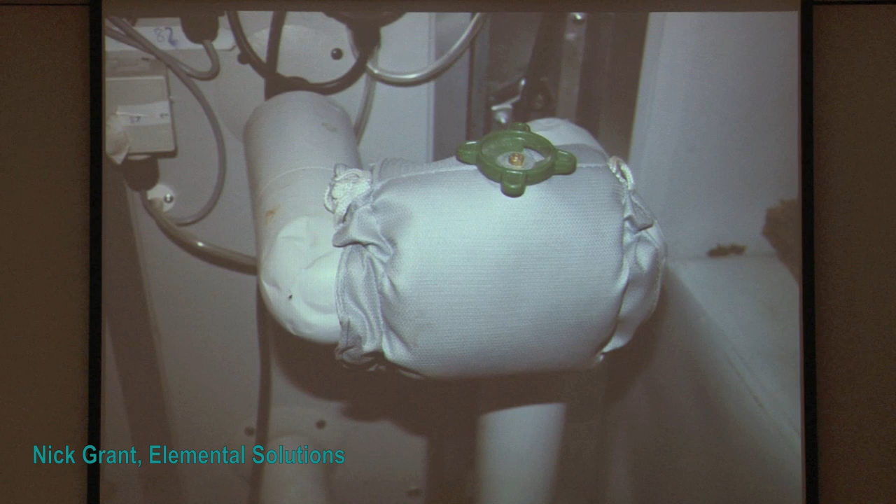British insulated valve cover. But you've got to insulate all the valves, all the expansion joints, all the bits. It's no good having a little bit of insulation and then bare pipe and then a little bit of insulation. We've got to get really obsessive about it.

Primary energy, this is work in progress from the certification. This may change a bit. You can see ICT, computers and stuff is a bit dominant. We think that's a bit overestimated at the moment, but it's high.

Kitchen, big one. Domestic hot water losses. Kids aren't doing a lot of washing their hands and stuff, but the losses still become quite significant. And domestic hot water use, this is using the German standard figures, probably too high, but that's what we use for certification. Heating is looking quite modest now, and auxiliary electricity.

And this is primary energy. We think we're going to be under 100 when we've got everything sort of argued, and that's our aim, but 120 target.

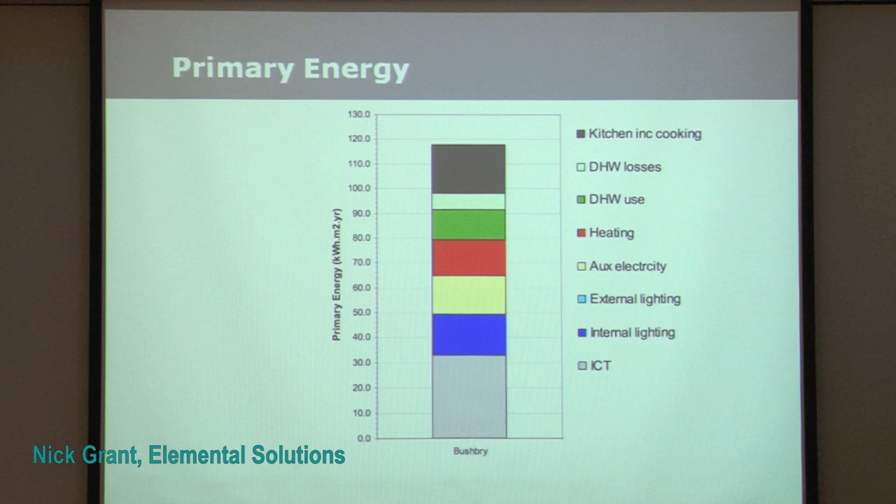And then, very important, site support. This is George looking at that tricky corner detail again. Toolbox talks, getting the manufacturers in to demonstrate products like tapes and so on. And also just feeding that back into the design and getting everyone involved, which is something Matt will talk about.

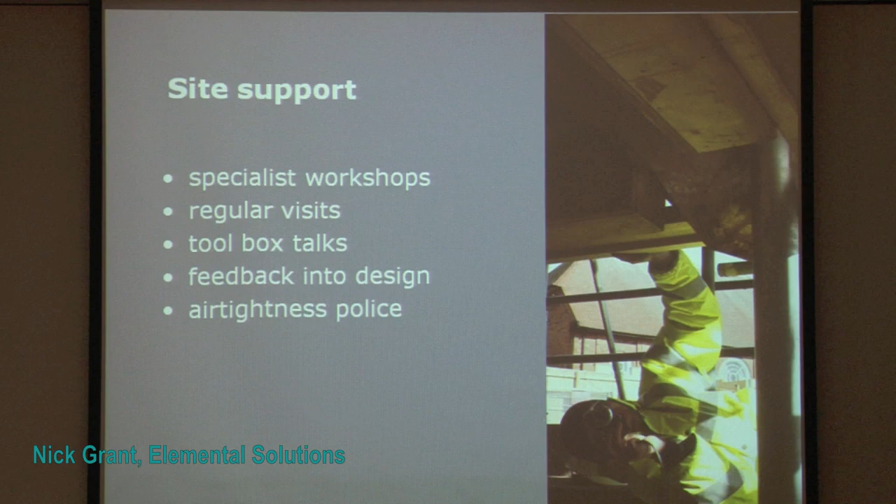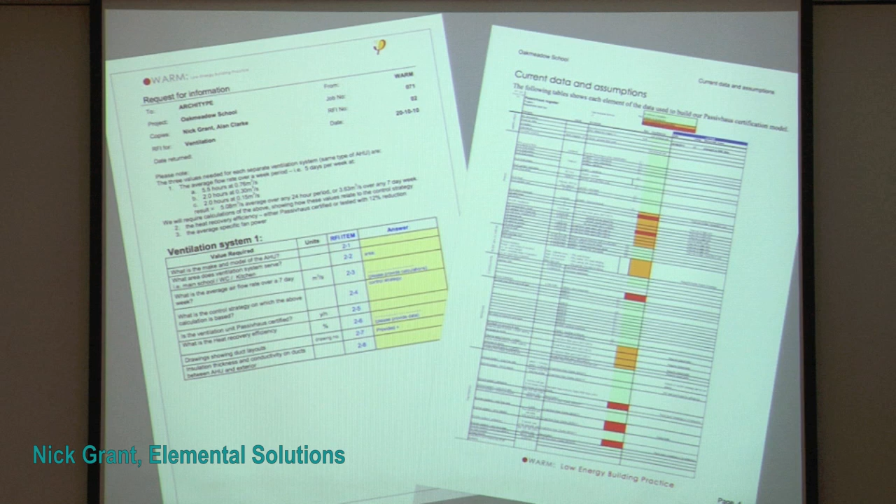And the certification process, we're working with Warm on this, and very good feedback. It's partly, as we go, that this is information. They're saying, look, the red is we still need information. Orange, we've got some indicative information, we just need a bit more. Green is they're happy. So this is an iterative process, and the target goes up and down as we go.

I'm sure there's some quote like this, but I couldn't find it on Google, so I made this one up. And it really echoes what Jono was saying. It's all the good stuff you want to put in, but the stuff that makes it brilliant is the stuff you leave out. That's the stuff that we think, whether it's an iPod or iPhone or these buildings, hopefully it's what we didn't need to do that makes it brilliant.

That's me. I hope I'm not run over too much. Thank you.

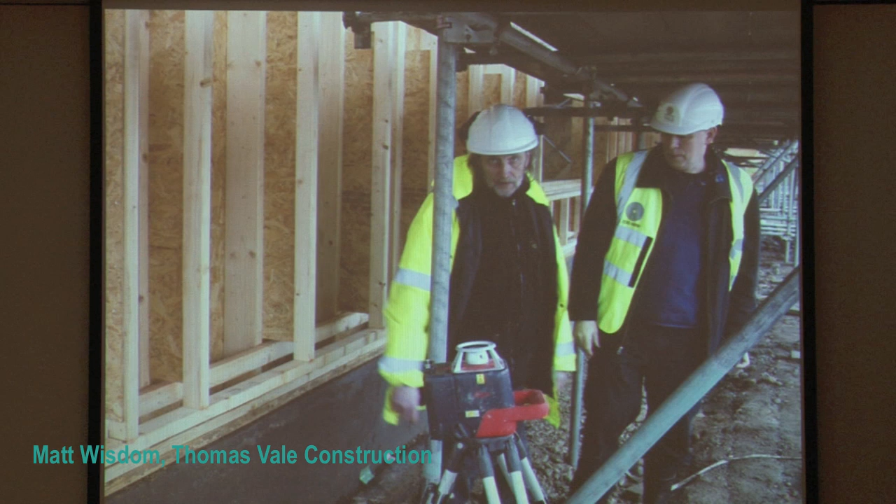Good afternoon, ladies and gentlemen. Thank you very much for the opportunity to come and talk from our perspective of the construction process. It's been a real adventure for us, and when we tell our site engineers you want to build a what, that's the sort of expression we get back. But hopefully he's been convinced by now.

That's Ian, who's been crucial to this project. So obviously 2 projects, 2 project managers, 1 construction manager overseeing the lot. John and Kevin, our construction manager, have been on a real adventure with Archetype over the last 5 years, building St Luke's, Blakenhall, and now Oak Meadow School.

So it's been a real learning curve for Vales working with Archetype to actually be strong-armed down the route of sustainable construction, timber frame construction, airtight construction. 5 years ago we thought it was a load of codswallop. Now we think it's the best thing we've ever done.

So there's been a real learning curve for us, and we've done a lot of research ourselves. We've really wanted to understand the process. So I went over to Germany, our site managers went to Germany. We went and had a look at German construction sites and realised that actually there isn't a big deal about the way Germans build. We're all humans, we've all got the same skills, and we can build exactly the same way. And that was the feedback I was getting from our site managers, that actually they're not doing anything different to what we do in the UK. They're just doing it in a more controlled way.

And so that gave us and our site management the confidence to actually get behind Jonathan's design and say we can do this and we can do it without adding on a load of cost. And obviously, as Nick mentioned, generally they recommend that you build a house if you're doing passive house. We thought we'd take a chance and build 2 rather large schools instead.

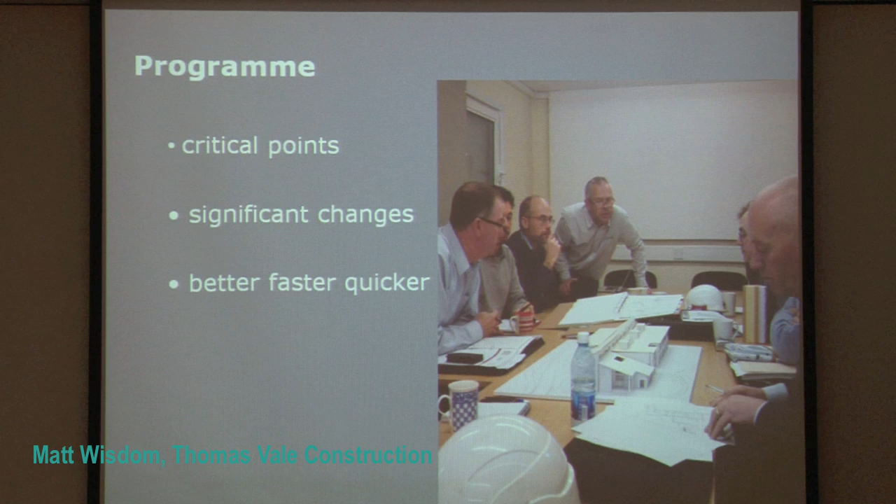In June we had an air test where we knew we had to reach that. Before that, of course, we had Nick beating us around the head to get the airtight details in and to get our supply chain to really understand what we were doing, the concept of it all. We had this wonderful little cardboard model which we could take apart and look in and say, well, that goes there and this goes here. All of that was really, really important to us really getting on with this.

So, programme of air testing. We wanted to do a room in April just to test the concept. We got 0.69, which isn't obviously what the passive house standard is, but we realised actually that was probably missing the point a little bit, because if you air test a room, you're missing the whole concept of the building, so we probably wouldn't even bother doing that again.

So we left that alone, went straight to the June air test, and got 0.34, which was a huge achievement. I think that was at that point probably the tightest school building in the country, and something we were really proud of. But unfortunately, Kev, our construction manager, was on holiday at that point, so he wasn't around to pay for the drinks to celebrate, so we had to just carry on building, which was a real shame.

And then just a week and a half ago, 13th of October, we got the final tests, which is 0.48. So we achieved passive house from a construction point of view - something we're really, really proud of. We're still building schools as a contractor that are nowhere near these levels, 5, 6, 7 air changes. So a 95% improvement on building regs.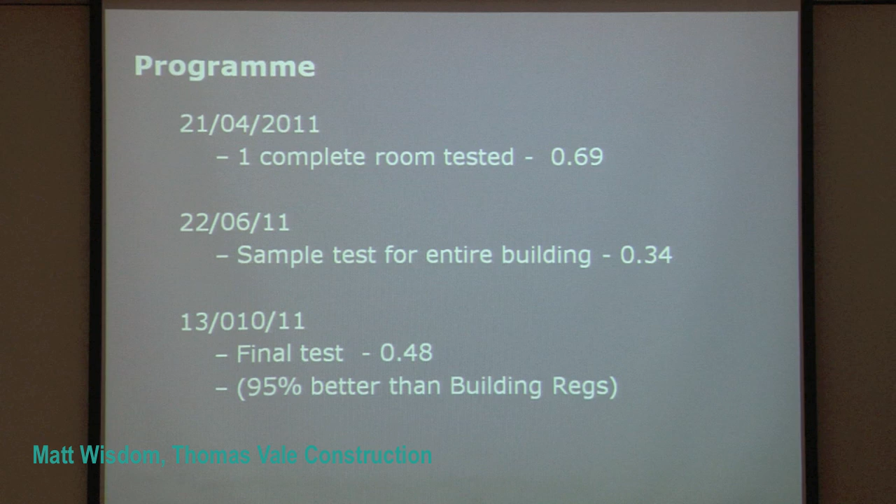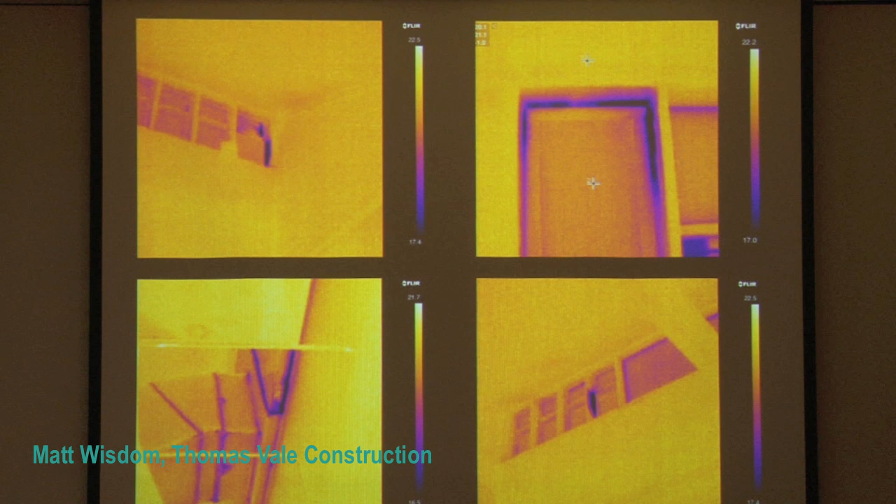The thermal imaging - I don't know how many building projects have guys going around with thermal imaging cameras. I think this is the first time we've ever done it. We are actually taking images during the construction process. This was really critical because it showed up that there were areas where we had air leakage - windows, clerestory, ventilation ducts. All of those areas were leaking heat, and we had to do something about that. If we'd done this at the end of the project, we wouldn't have been able to rectify it. It would have cost us a lot of money, a lot of time, and we would still be working on the buildings, but we've handed them over.

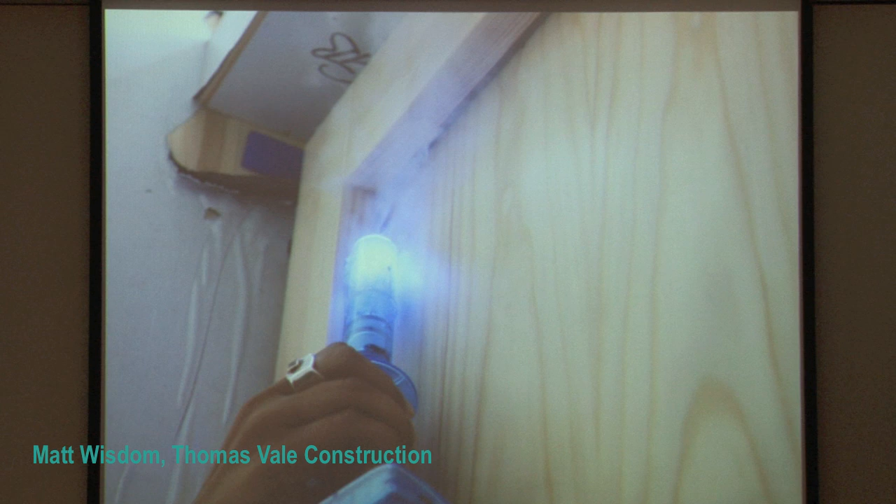Smoke testing, that was at the curtain walling or sliding door. We had some issues with that. I think the point is we're testing the building as we're building it, which is unheard of in construction these days. Some further testing - I started to wonder if that was a lightsaber, but apparently it's a smoke test.

So we had some happy architects when we got to our 0.48 result, and that was a real achievement, a real collaborative teamwork.

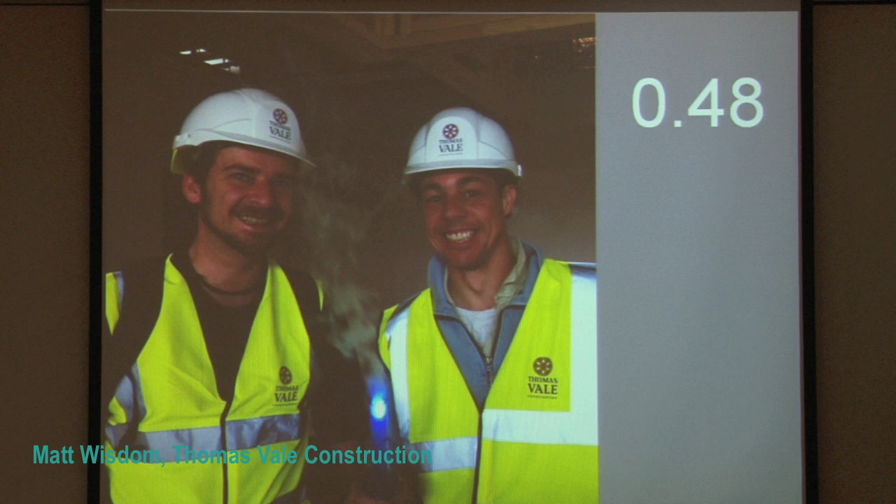I just want to touch on supply chain. Obviously I've talked about collaboration and working together, but it's got to go all the way through. It cannot just be at the design stage or just with the contractors or with the sustainability people in the contractor - it's got to be right through into the supply chain.

We had to really bring on board our supply chain. We had 2 timber frame contractors, one on each project, which was quite an interesting exercise in comparing how each one performed. But they worked really, really hard, and you can't underestimate the effort that went into the real work of detailed design of each of those elements of the timber frame.

Really critical - windows. We had one window manufacturer on board, and they were able to get German window parts into the UK and assembled here so we could get them onto site in time. On our previous project, St Luke's, we had Swedish windows, and they were actually delivered 16 weeks late, which was a major problem for the company, for us.

Our guys worked around it, and we managed just about to hand the project on time. If we'd had a 16-week delay on this project, that would have pushed our whole air tightness checking programme out until we'd still be doing our first air checks now. So that's a real issue - actual delivery and supply of products. If we're relying on European manufacturers to supply our products, we're going to have an issue in terms of supply control. If we can get them manufactured in the UK, we've got much better control, which was something we had to learn early on and encourage our supply chain to take on board.

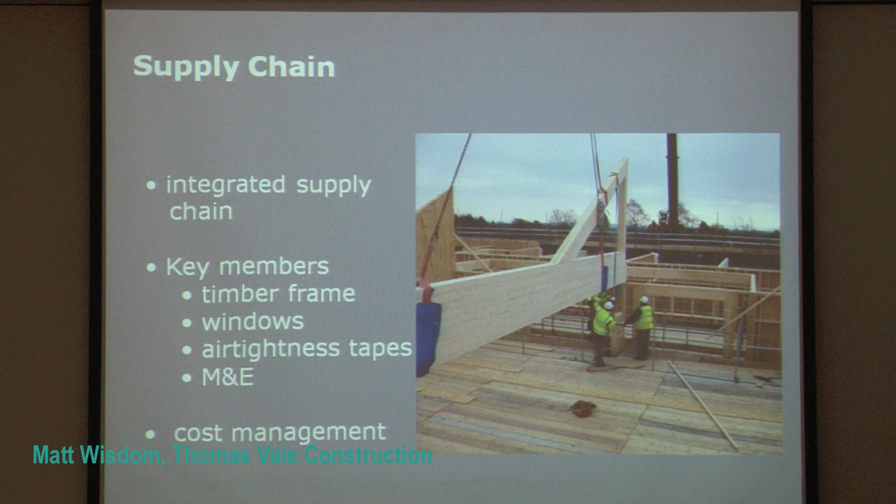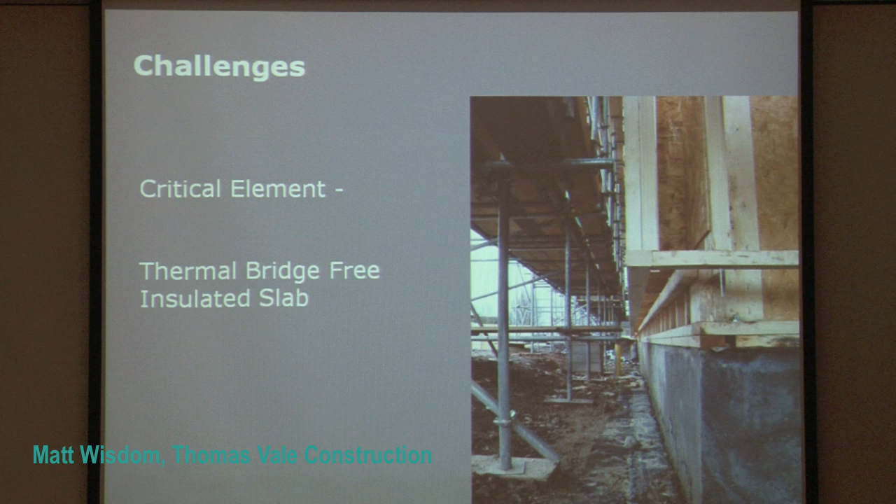So some challenges for us - obviously it's not all plain sailing. Building the largest thermal bridge-free slab in the country was quite a challenge, and again one we've achieved. But hitting that straight edge, with real tight tolerances of plus or minus 5 millimetres on the edge of that slab - if we didn't get that tolerance, the insulation wouldn't wrap round up into the timber frame and round into the ground. So we had to really be careful and really concentrate on that slab.

That was further challenged by the fact we were casting that slab in the coldest winter we've had in something like 20 years, so that caused us some problems. But getting around it, and big lessons learned, we used timber shuttering for the first time. Next time we'll probably use some sort of metal shuttering or even an insulated formwork around the slab - lessons that we really needed to learn.

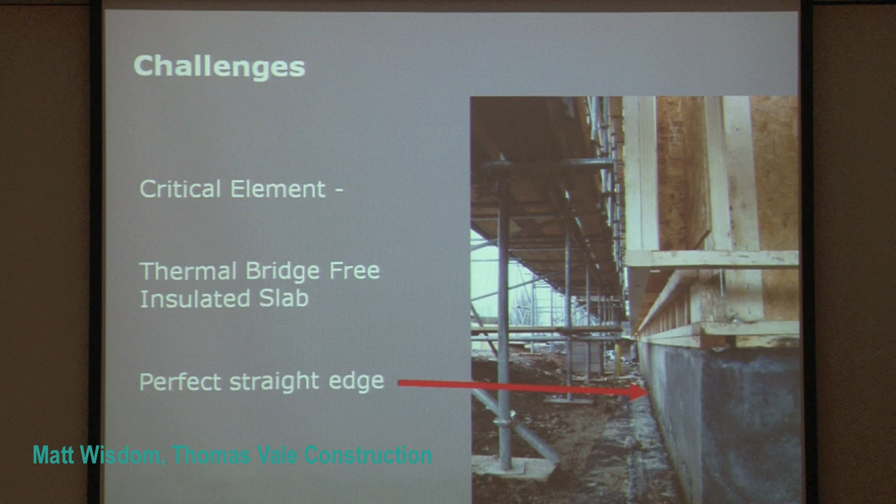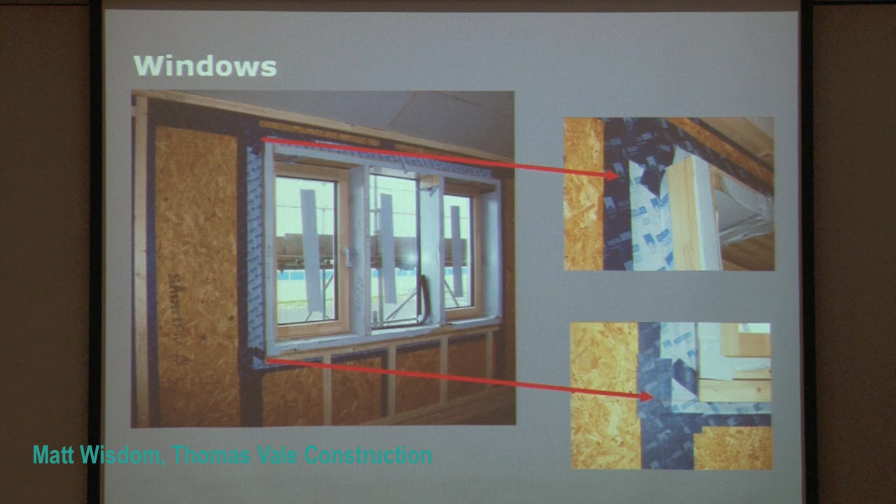So costs. Everyone always asks about the costs. A few years ago, Capita Symonds did a cost model of a sustainable school, a BREEAM excellent school, which they came out with. A square metre cost us £2,151 per square metre, with an M&E element of £454 per square metre.

St Luke's we delivered for just over £2,000 per square metre, and we brought that down again for Oakmeadow and Bushbury, which are passive house. So really the point I'm trying to make is that we're delivering schools on cost, just over £2,000 per square metre, with that M&E element forming part of that.

So yeah, M&E is slightly higher on the passive house schools. Potentially that would come down if we reconciled the heating strategy in the building and looked at the ventilation strategies to see what we could do again. We don't want to leave the project there, and we really believe we can take that down even further. We've had a number of workshops post-construction on how we can redesign the building to improve that number.

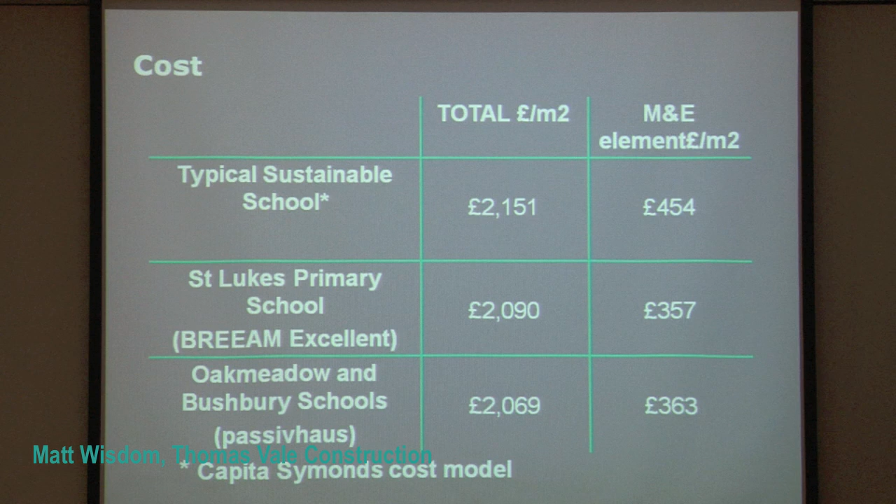I'll just note that those numbers are exclusive of groundworks and landscaping. So really, just a quick conclusion from my point of view before I hand back to Jonathan.

For us, passive house is the future of construction. It's critical if we're going to achieve the carbon targets the government is setting, with energy prices skyrocketing. But probably two important things I want to point out: first of all, we can build this in the UK. It's not a magical German standard that no one else in the UK can do. We can do it, and we've done it.

And the second point really is if we can take a partnered and collaborative approach, then it's achievable. If we get contractual, it will never work. So thank you very much.

So just to conclude very briefly, Architype and Thomas Vale have now developed a joint venture to respond to the challenge of the James review in bringing down costs and achieving standardised construction. We're now targeting in future projects achieving this with 20% less by further working our integrated design team and our supply chain, using a fully integrated BIM approach to how we work.

And you can find out more about it on the stand downstairs. But in conclusion, how have we achieved it overall?

Well, I think the critical thing is we had an integrated total design team commitment from every member of the design team from day one. We worked very hard and appreciated and used the passive house expertise of Nick and Alan. Critically, we integrated passive house into the design from day one. I think if you add passive house at some point during the design process, it will always cost more. If you integrate it in, you can make it work.

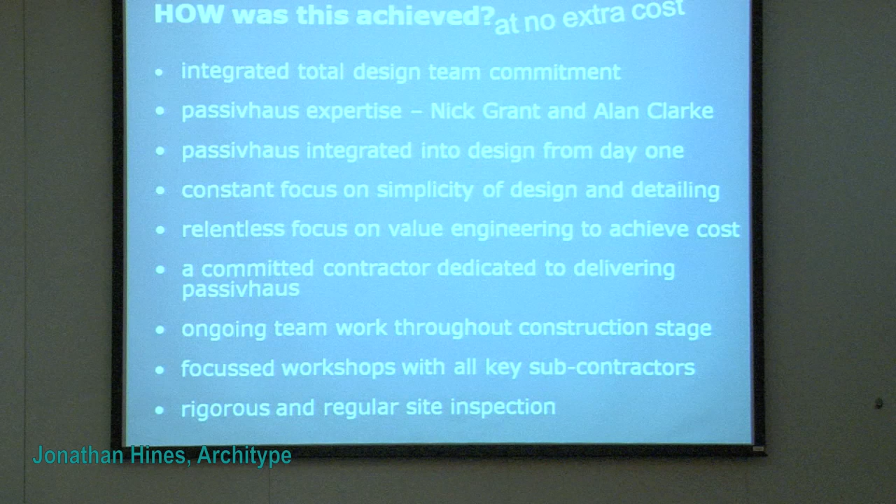We had a constant focus on value engineering at every stage in order to achieve the costs we needed to achieve. We had a committed contractor in Thomas Vale dedicated to delivering it. Throughout the whole construction stage, that ongoing teamwork continued at every stage with focused workshops with all the key subcontractors and commitment from them, and then an ongoing process of rigorous and regular site inspection.

And on delivering two major schools to this standard, we've got not one single piece of contractual paperwork on file in either direction, which I think demonstrates that type of collaboration.

This was tweeted by Wolfgang some time ago. I think just to summarise the idea of simplicity: where we were in the 19th century, where we got to in the 20th, and where we are heading, hopefully, with Passive House in the 21st century.

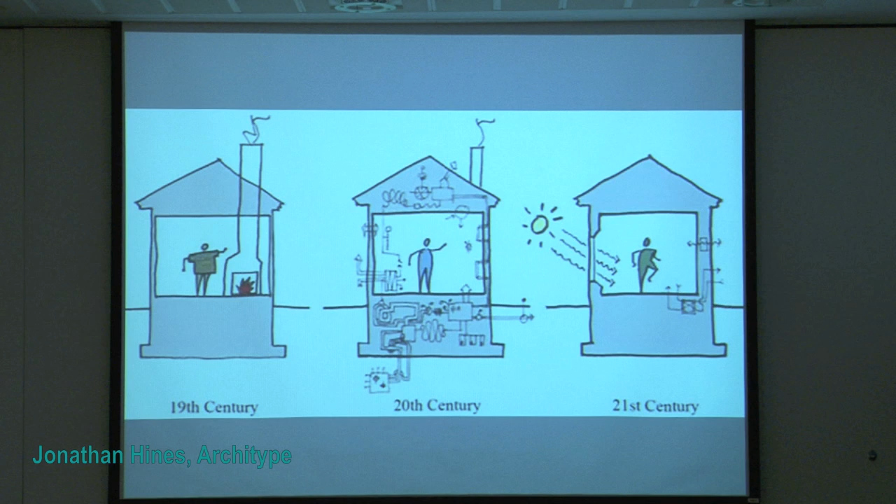So finally, we believe in Passive House, not because it restricts design, but because it is logical, evidence-based. It does encourage simplicity, but most of all, I believe it frees us up to be creative. It doesn't restrict our creativity, it enhances it, because we know the building's going to work. At the end of the day, it delivers reduced energy. We can also achieve high quality design, beautiful architecture that uplifts the spirit at an affordable cost. Many thanks.

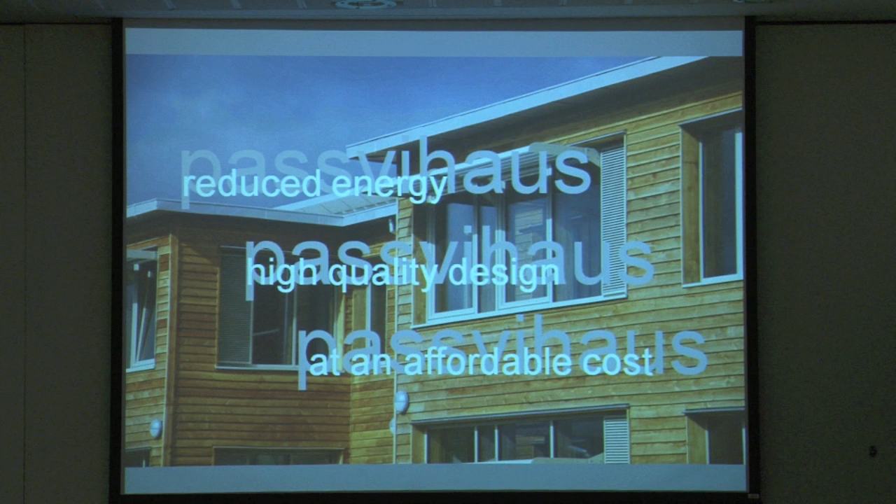Some very strong messages there in terms of the psychology as well as the contractual approach. It always reminds me of the story of Riedberg School, how they first commissioned the M&E team. Traditionally M&E teams were paid based on a percentage of the amount of kit that went into a building, so of course more kit meant more fee. In that situation they changed it and asked how much they would normally make on their fee from the kit. They said this much, so they said now design all the kit out, you still get your fee. Do what you're trained to do. Here's your creativity back in the hands of the people who can do it. And it seems that philosophy worked very well on this project.